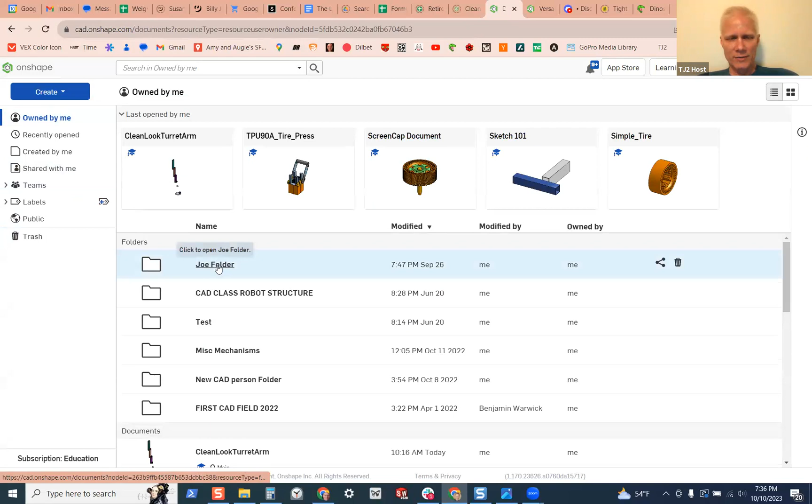Okay, so we go to Onshape. I'm going to go directly to a folder I've already put in here so I don't have to reshare everything, since I've already shared this folder with TJ2, so I don't need to give special permission to everyone. So I'm going to create a new document, and we're going to call it two-stage Falcon gearbox. Okay, so cool.

So just like normal, we're going to get things in here. We have to bring in some parts, so I'm just going to grab some parts at the very beginning. I have to minimize all your faces so I can actually see. I don't know if a Falcon is available, some things are. There are different options, I'm using MKCAD. You definitely should look up how to install MKCAD.

But for motors, under MKCAD I pull out this flyout menu here, motors, and I am going to grab a Falcon. Please be on here. I haven't done this - doesn't look like motors configurable shows it. That looks like a Neo. Does anyone know if it doesn't? It should be under motors, which is interesting. You don't see it? Yeah.

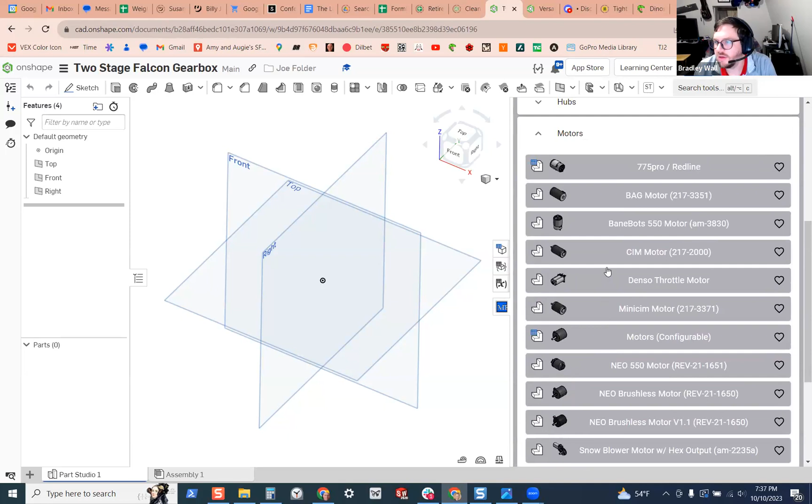What if I searched it through the search bar up top? Okay, I just typed Falcon, came right up. Falcon - that's so weird, I have it on my screen. Hubs, pulleys, I'm wondering.

Are you in the assembly? Oh, I'm in an assembly right now. Hold on, okay yeah, so the easiest way would be if it was just already here. I haven't done this before, but you guys may not be able to. You know what, you can just steal from other people - that's a way.

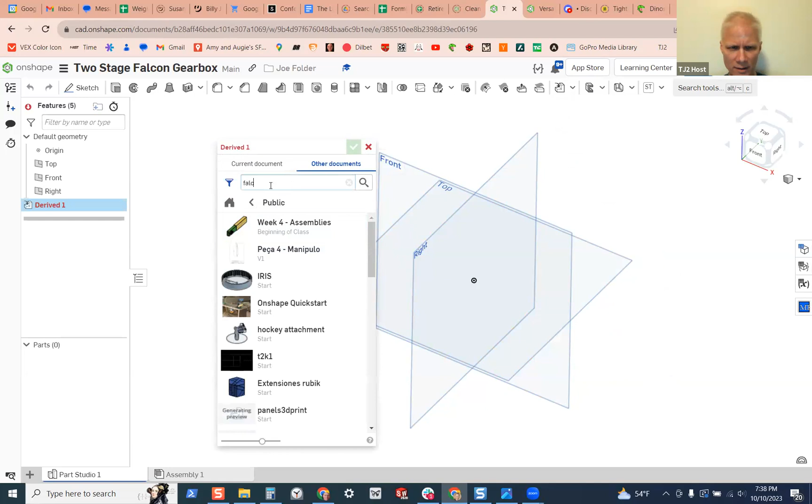So I'm sure the Falcon is available someplace in a public space. We can pretty easily go to a derived part, go to other documents, and search public, and I can put in Falcon 500. Let's see if it's someplace. If that looks like it's... it's in here, but it's not super simple. What if I grab one of these?

So the problem with the Falcon motor actually is that the motor you bring in is super complicated, so I don't really want to bring in the full complicated one. I'm just going to design the Falcon from scratch, because we don't really need to have everything. Wait, there will be some things in there that I do care about.

Okay, so we're going to do the next thing, which is go to Vex Pro, Vex Robotics, and put in Falcon, and there's going to be a step file we can just import. So, CAD files, and Falcon powered by - we want the Rev 2 or Rev 3. Most of our motors are Rev 2, I believe. Yeah, Rev 3 is the slightly bigger one, so I'm just going to grab the Rev 2.

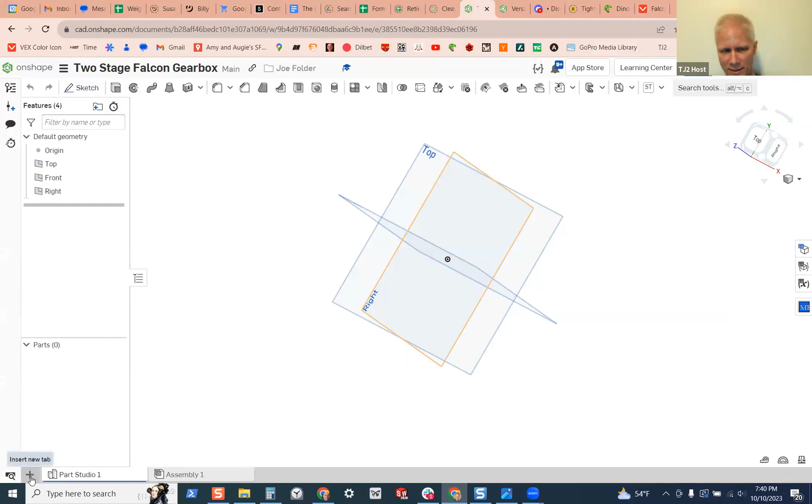It's downloaded, and now I go back to my folder here. I can't import it until I first make a tab here, and choose import. So I go to this little plus sign and choose import, and there's that Falcon step motor, and I'm going to put everything into a single file. So there it is, it's thinking.

Eventually there will be a thing called CAD imports. I'm not sure what information is in these files, but it will make a tab here someplace when it's done thinking. Eventually you'll see a tab show up that will have the Falcon motor in it. So that's one thing we needed - we need to get the Falcon in.

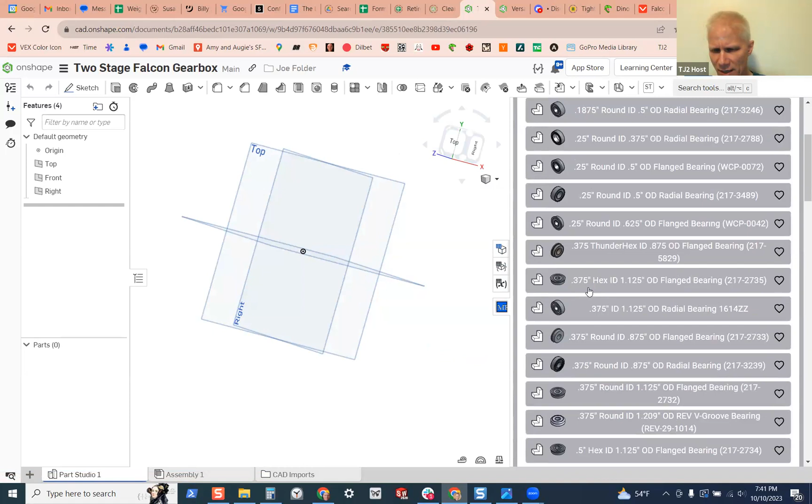We also need to get in one of our standard bearings. I think I've made it one of my favorites - no, I haven't. So we want to use a 1/2 inch hex bearing.

So I'm looking for my half-inch flanged hex. That one looks good, I'm going to put one of those in. It's just going to pop into the middle of the assembly. I'll move it later, but I just want to get one in.

And then I think we ought to use, yeah, we can just use this bearing. This bearing will be our bearing for, it'll be the one we use for all of them.

Meanwhile, as I was dancing around talking, notice this folder, this file just showed up. I don't like to have all of the things I import in my main assembly tab, so I'm just going to move that over and put it into the CAD import. Now it's sitting here in that file in addition to this file that I don't know what it does, but anyway, that's what a Falcon motor looks like.

So now in order to get back to my other tabs, I have to hit this home button over here. And then I can name the part studio, we're going to call it Falcon Gearbox.

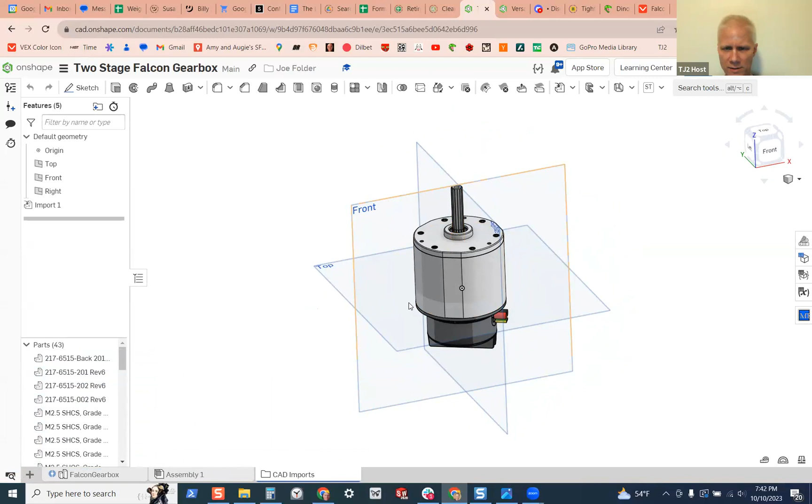Okay, so now, what happened to that? So first of all, if you look at what they import, there are just hundreds and hundreds of little parts. They have, can you see how as I scroll on this side here, it highlights the part. They've got the ball bearings, the literal balls inside the ball bearing. Who does that? We don't want all those things.

So let's go in and only grab the things that I really want. The things I want are this, that part, and that, and that. Those are all the parts that, oh wait, I also want the output shaft. So those are all the parts that I want.

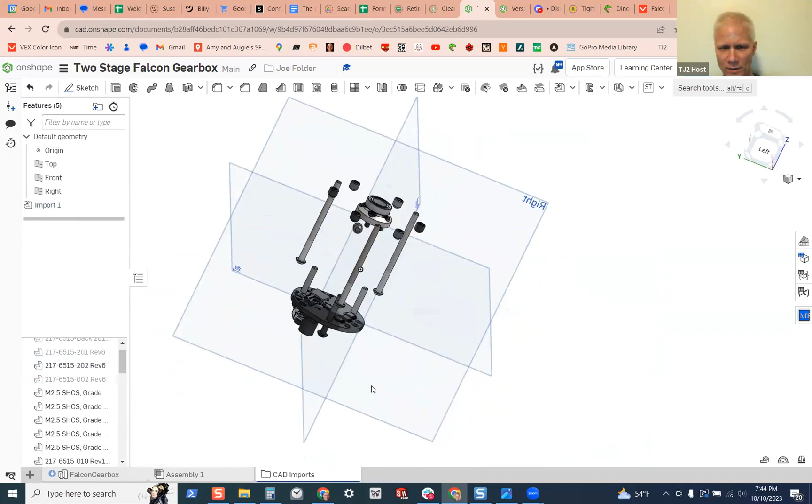If I make those go away, so right click, or I can just go over here, I make hide. So all of those things are just nonsense things that I don't want. Wait a minute, what happened to them? Oh, okay.

So I don't want all those parts. I want them to not only be hidden, but gone. So I'm going to highlight them all and hit my delete key, and they should all disappear once it's done thinking, because there's so many junky parts in here. Right click, delete.

Delete parts. And now I can grab all of these and make them show up. Now I've got a much simpler version of the Falcon, something I can deal with more easily.

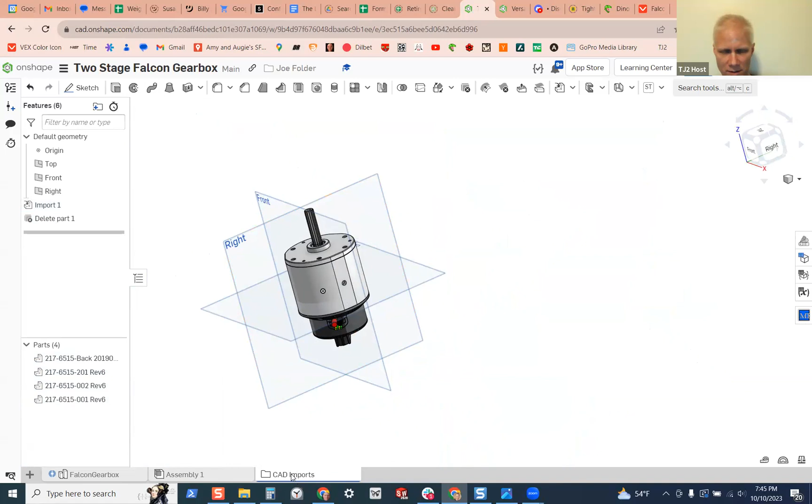So let's call this, yeah, that's fine, we'll leave it as one thing. Now I'm going to go back to my Falcon Gearbox, and I'm going to do a derived, and bring a Falcon in. So I go to my current document, and I can select them individually, or just select the whole thing. Then as soon as it's done thinking, I click the OK button, and it will magically show up.

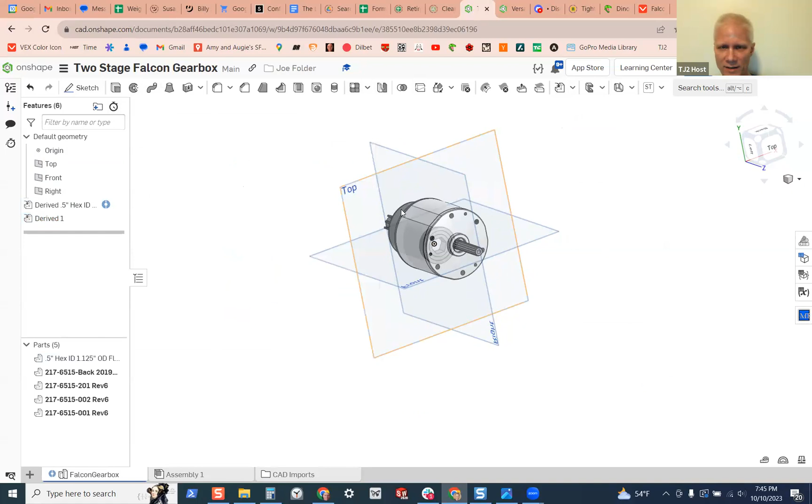So now we've got the motor, and we've got our bearing, the two things that we want, the hex bearing and the motor. They're not in a good spot, so let's...

Take and make something, let's make a sketch that we're going to use to help derive it, and I want the sketch to be in front of all of these imports, so I can know where to put things in. I like drawing on the top sketch, so let's make a sketch that will kind of lay out where all of our gears and shafts and stuff are going to be.

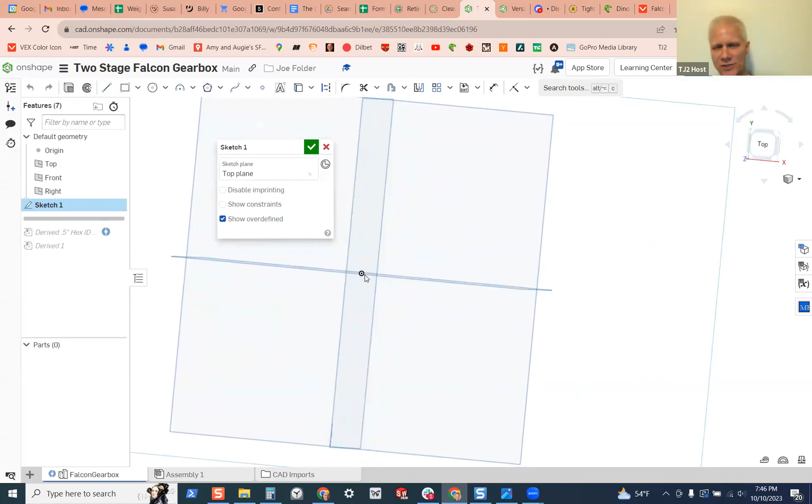So we sketch on the top sketch, and we're going to put in just some circles that are going to kind of take up the things. Also, I don't like seeing these, so those are all gone. We're going to draw some circles that are just going to represent the pitch circles for the gears that we're going to use.

So I'm just going to put them in a line. I said it was going to be a two-stage something or other.

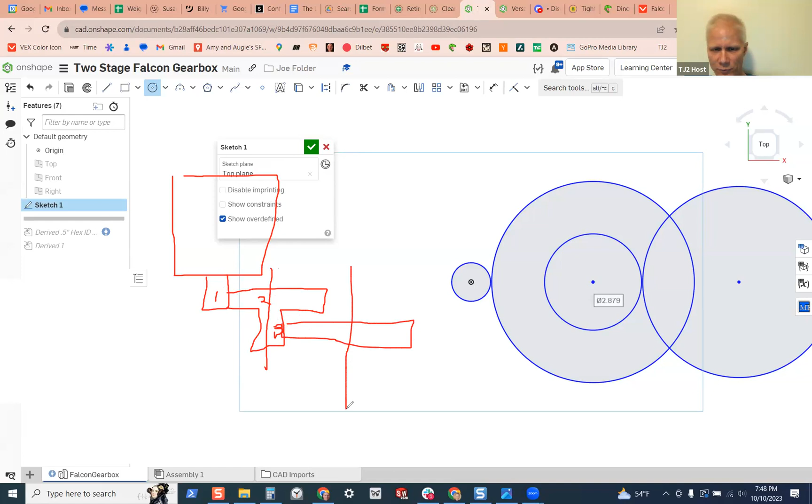If you look how gearboxes work, let me draw here for a second, annotate. So the way gearboxes work is the motor is going to have a gear, and then there's going to be a thing we call the cluster gear that has two gears on the same shaft. So there's gear 1, gear 2, then gear 3. Gear 2 and 3 move together, and then there'll be another gear over here that will be my output shaft, and then the shaft will go out. So the general idea is we're going to make a box that will kind of look like this.

It'll have a bearing. I'm just going to put X's in where I have my bearings, so there'll be an X there, there, there and there. So this is my motor, it has an input. I have 2 gears on the same shaft, and then I have another setup.

Now, how big are these gears? In first circles, it's very common for people to use what are called 20 DP gears, 20 diametral pitch - that's what that stands for, diametral pitch gears. That's very common.

What that means, the diametral pitch, is you take the pitch diameter - this little circle I've drawn here. The PD is equal to the number of teeth divided by your diametral pitch. That's kind of a formula we use a lot.

If you just go and grab the gears, they won't have - well, sometimes they have a pitch diameter, but not very often. But if you look at that, there are teeth that go above and below that pitch diameter, so they're bigger and smaller, bigger and smaller.

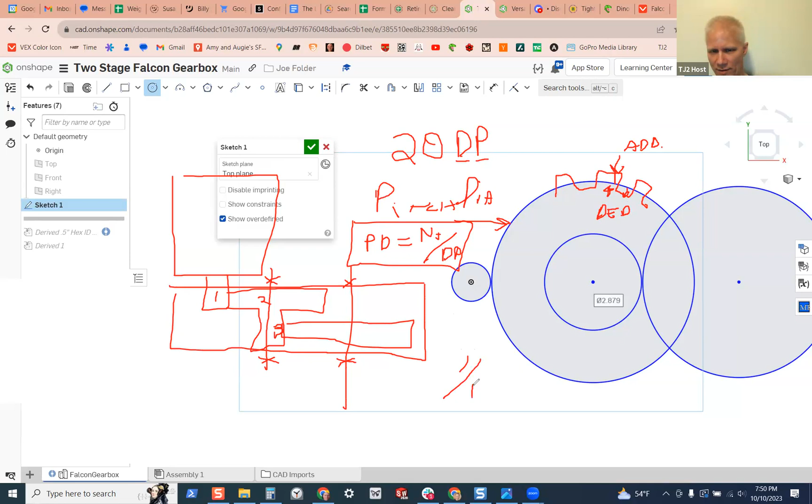As it turns out, for gears, the addendum is 1 over the diametral pitch, and the dedendum is 1.25 over the diametral pitch. So we go a little bit bigger, 25% bigger down, so that the tooth that comes in has a little bit of a gap between them.

So anyway, all that is to say that we need to keep track of 3 things about a gear. We need to keep track of this pitch diameter, so we know how far to put them apart from each other, because the pitch diameters are line to line on each other. And then we need to keep track of the root diameter and the OD.

So I'm going to clear all of this nonsense now, and I'm going to save my - well, we'll make the formulas as we want to do it. So everything in this sketch is going to be - I need to get out of this mode so I can actually CAD again.

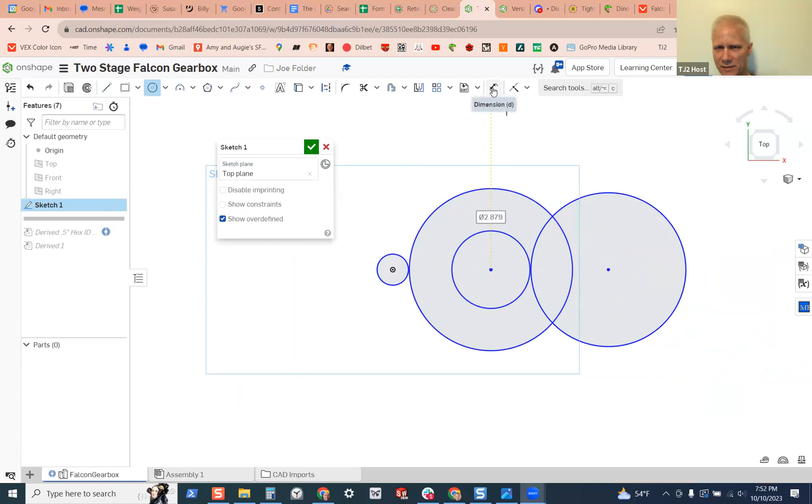So all of these things, this is gear 1, gear 2, gear 3, gear 4. Okay, so all of these things are going to be written as equations, so that we don't have to do anything.

So I'm going to just start putting in numbers here, and I put in a pound sign, and I'm going to call it a new variable - this new variable is going to be, we're going to call it n-gear-1, and that value - well, the problem is I want to put a formula in for, well, no, the n...

Actually, I don't know what numbers are available inside of that for a Falcon. Can somebody look that up for me? Can somebody look up how many?

You can go here, you can find search - well, I'll just do it. Falcon. And tight fit Falcon accessories. Yes, so that looks good.

And what are we talking about? They're 20 DP Falcon pinions. And what size do they come in? Joe says 8 to 14. 8 to 14, what's a common one? 10? We use 10s a lot.

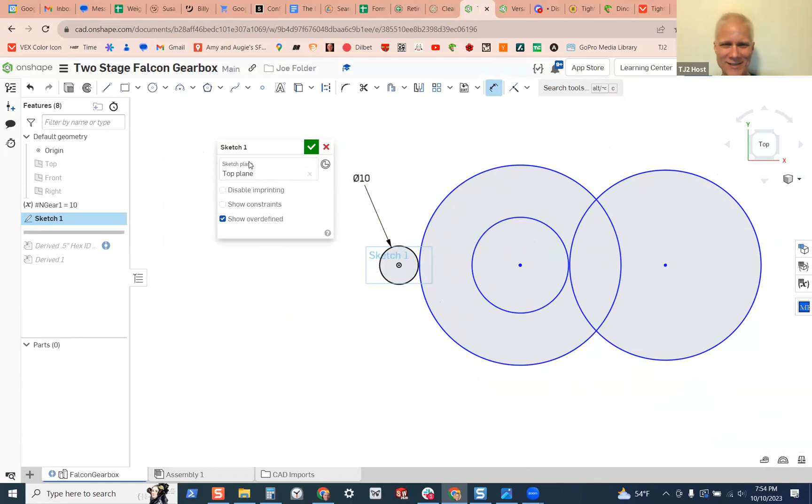That isn't really what I wanted. Sorry, I'm going to exit the sketch for a second, and I'm going to roll back up to here, and I'm going to make a new variable, because I should have just defined all these things beforehand.

We're going to call this the DP, and we're going to say that turns out to be - this should just be a number also - and it's going to be 1 over 20. No, diametral pitch is 20. Yeah, 20, okay.

So now I've got my DP set to 20, and I can go back into my sketch. I didn't want to have to define this separately, so I've got this variable, and I'm going to edit it to say the number of teeth divided by my DP. Yes, perfect.

That makes sense because another way of thinking about the DP is the diametral pitch - it's like the number of teeth per diameter. There's an easier way of doing it when you use modules - pitch diameter is 1 over the DP times the number of teeth.

So anyway, that's fine. 10 over 20 is 0.5. That seems perfect.

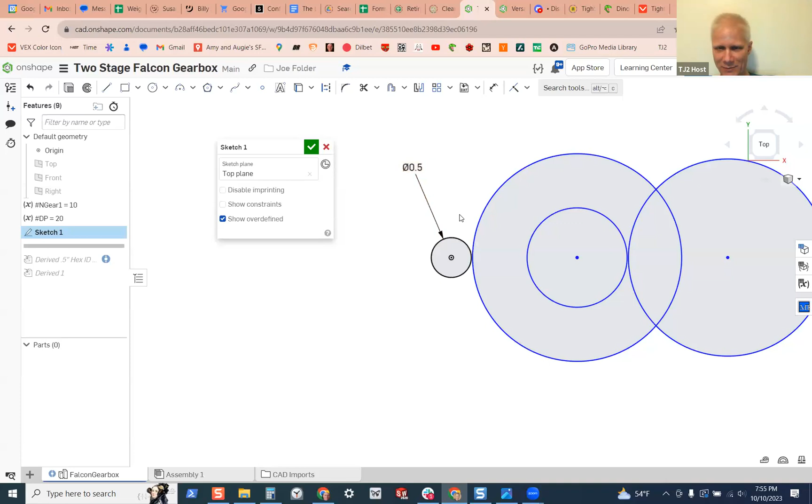We're going to make some things horizontal here. I want this to be horizontal with that, and I want that to be horizontal with that. And I want some tangents - this to be tangent with that, and that to be tangent with that.

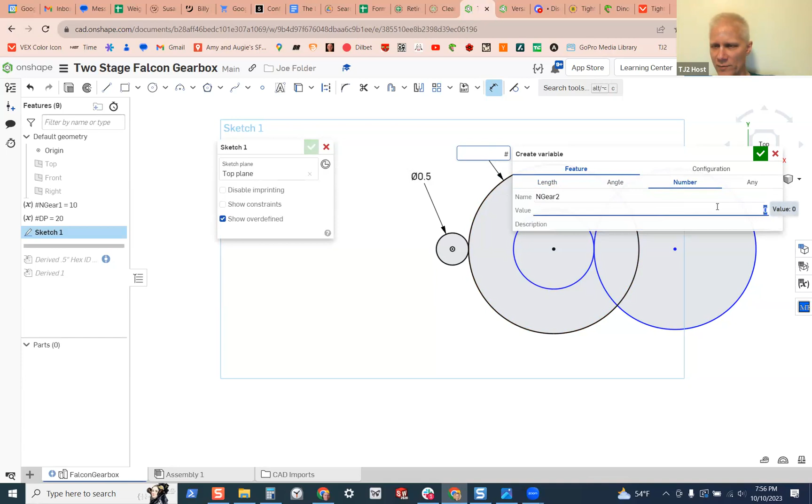Now we're gonna just define all of our diametral pitches here. This one is going to be equal to a new variable - it's a number, and it's going to be n gear 2, and the value is going to be, I don't know, say 40. 40 seems like a good number.

But then that isn't my diameter - my diameter is that divided by pound sign dp. All right, so now that's the first gear.

Then the next set of gears, I'm going to do this pound sign, make it a new variable, make it a number, call that thing n3, gear 3. We also want it to be something we can buy - I think it's pretty easy to buy like a 20-tooth gear. We can change these later.

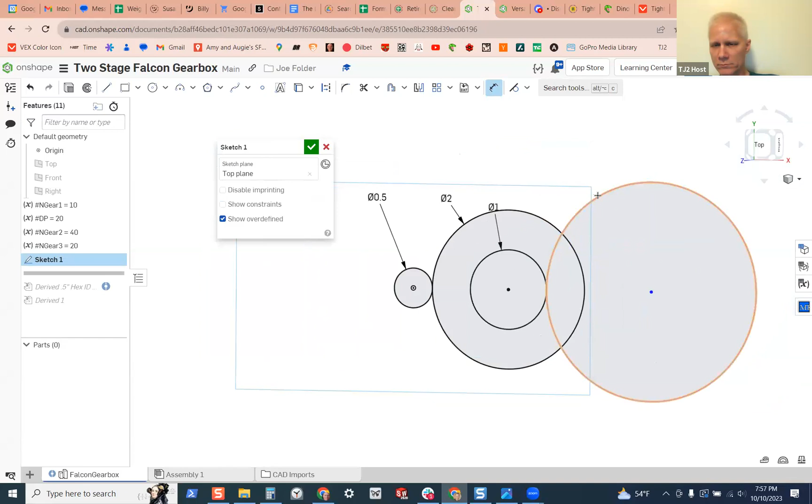But I want that to be divided by dp again. Okay, and then the next one - why don't we make it a 40 again? So here, pound sign, we'll make it n gear 4. And divided by - oh wait, I have to make it a new variable, sorry.

Variable, number. Let's make it 60, why not?

So then we'd have a 12-to-1 gearbox because we got a 4-to-1 in this one. Okay, so those are our values. Now we've got our center distance - notice everything is black, right?

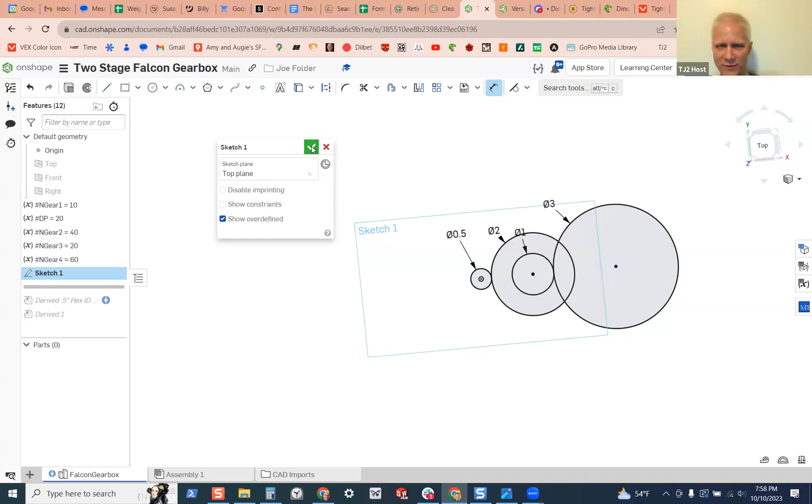So this is going to be our kind of master sketch for figuring things out. But what I'd like to do is, when we're designing things, we need to know how big of a room should we leave for the gear teeth and things like that.

So I'm adding teeth around here, and I'm going to draw some construction circles to keep us from getting confused - just a bunch of circles like this, one for every circle. Then I'm going to define the gap between there and there as 1 over pound sign dp. Hit enter - so that's how big the teeth are, that's how big the OD would be on this.

I can do the same on all of these - pound sign, 1 over pound sign dp. I know this seems like it's just sort of boring setup work, but...

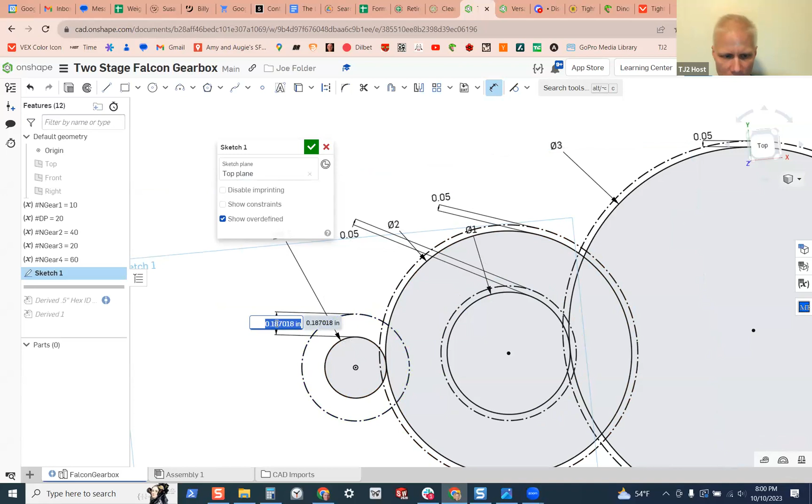It's going to make our future work very easy to change when we want to do things later. And from there to there - 1 divided by pound sign. Okay, so now that looks like a perfectly beautiful sketch that will tell us where to put other things.

I'm going to change the name of this, call it gear setup sketch. Okay, so now we can go down and put things where we want them to be.

So what I propose we do now is start putting our pieces where we think we want them to be. Somebody look up what are typical thicknesses of gears. When we imagine things, we'll have a bearing here, or we could actually import the gears, I guess. Yeah, why don't we do that too.

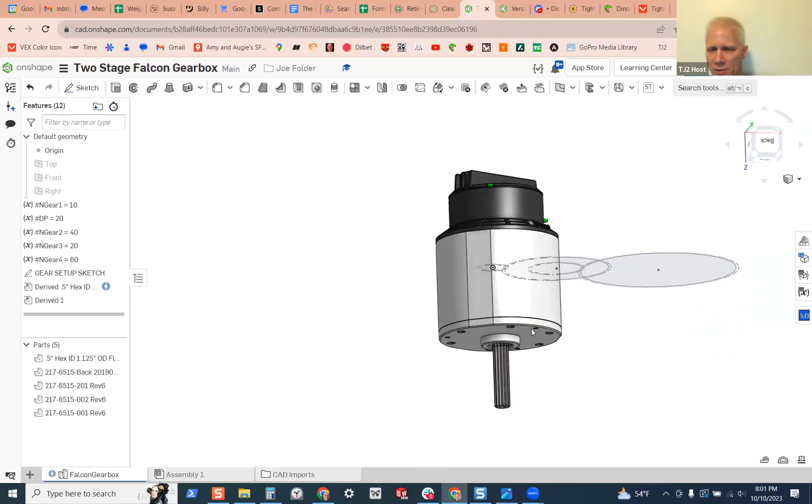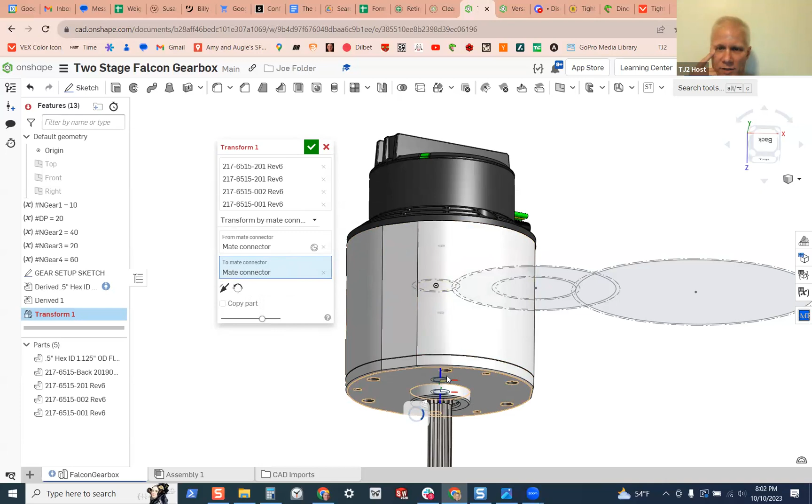So as I hit this, there's like an icon - see, that's the first one. And we want it to go up to that pitch circle there, boom. All right, and we're going to move the part, everything. It's thinking, but it should move it. And that's kind of what we wanted. Let's do that.

So now we're going to have to imagine that. Let me blank this gear for a little bit. We're going to have to imagine that we're going to have a housing that this is going to be peeking through, and we'll have to be able to get access to these screws to hold this in. And then we're going to want a bearing.

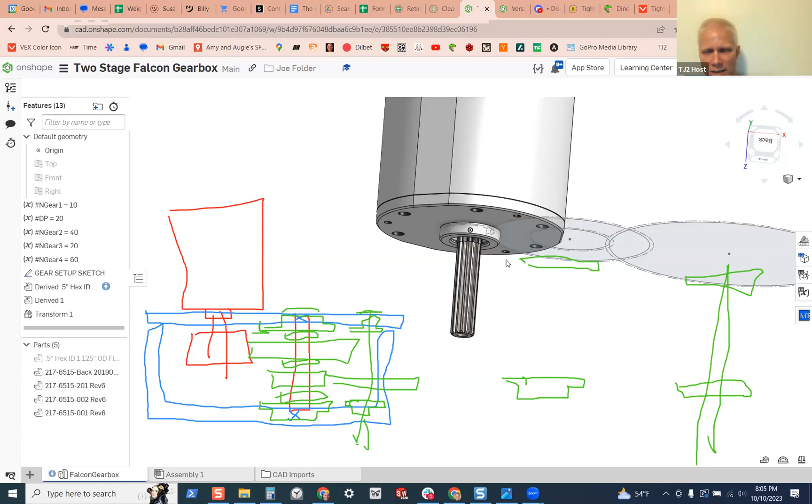The output shaft is going to be on this side, and we want this to be blind holes so that the shafts don't fall out. So we have to have enough room of the blue plastic to hold that in. Anyway, so what I was going to say is we could start placing these bearings in place so that we could see where things are.

Yes, let's do that. Let's put the bearing in where we want the bearing to be, and then we can see where we're going with the next thing. So I'm going to clear all my drawings and go back into mousing. Okay, so I've moved one thing and I've done a lot of talking. So why don't we pick somebody who wants to take this drawing?

You're going to have to find this Falcon Gearbox in my directory, and you're going to have to be able to open it. And then, well, it looks like I've hidden it. I want to see if somebody can move this to the right spot on here.

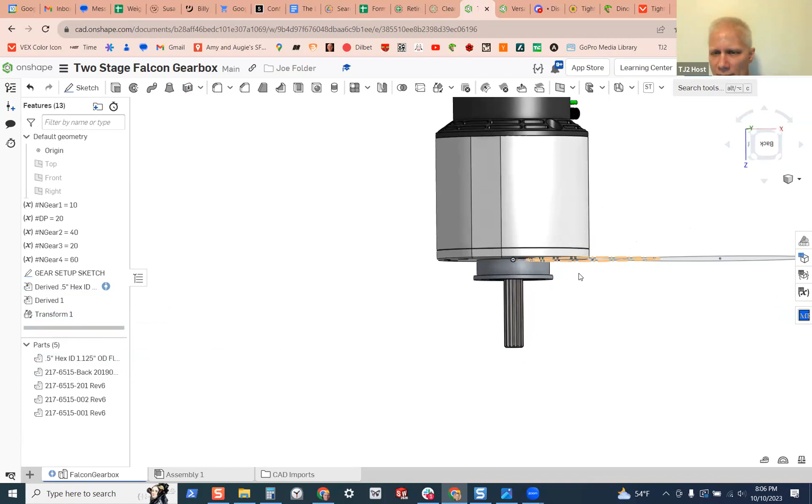I think it's going to take 2 moves the way we have it, because yeah, we're going to want to have that. We should, yeah, anyway, so let's think about how we want to do that.

So anyways, there's somebody willing to, let me be able to see all you folks again. Is there anybody still with me that would be interested in trying to do the move of this part that we put in? Zachariah, you usually are up for trying things. No?

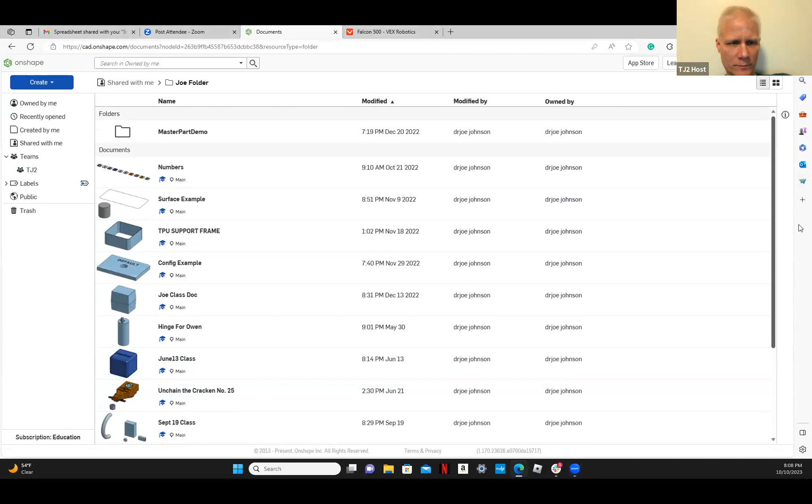Yeah, so we'll try to get them where we want them to be. All right, so find my folder. Is it this? Yep, 2-stage Falcon Gearbox. Yep.

Okay, so when we try to use move, once we get into the moving icon, so hang on, let me... will I be able to annotate? Yes, I can annotate. All right, I'm in red.

So the move part is this feature here. As soon as you go into that, you're going to be in the mode where it's asking you for different things. Pay attention, it's blue right now. So it's saying, what is it you would like to move? So what is it we would like to move? How are we going to select the bearing?

So you can just click on the bearing right there. Your mouse, just mouse over it and click on it. Okay, so see, as soon as you clicked, it showed up here. Right, and now it's asking you, so you can continue to click other things, but we're only doing 1.

That's fine. Okay, actually, why don't you go over here and let's get rid of the motor for right now, because we don't really want that. So just highlight, okay, so in the model tree, you can, down where the parts are listed, you can grab those 4 parts and turn that little eye, poke them in the eye, and they'll disappear.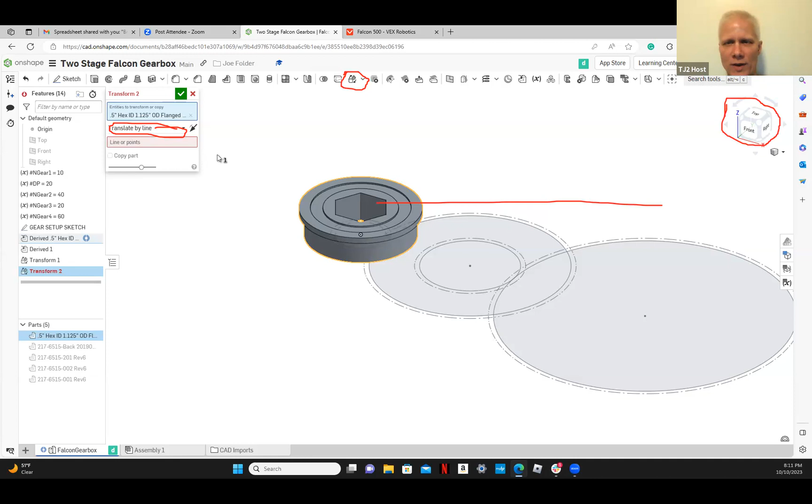Okay, transform by mate connector. Now, this is the one where you pick the from, and then you pick the to. So you're like, hey, what would I like it to do? Well, I would like it to go from where it is to this spot right here. So you would like this spot, this circle here, to be on the center of that circle.

So now as you're highlighting it, can you see it's kind of putting a temporary highlight? So if it were me, I would flip this over so I could really see the bottom side, because you really want to see things from the bottom. Yeah, there we go. Now you can highlight, if you highlight this edge right here, you'll see a mate connector show up right in the middle, right there, okay?

And you can pay attention that the Z is oriented the direction you want it to be. That's the thing we really want, that Z to be kind of lined up with our axis. So just as you're selecting things, you're going to want to kind of line up the Z's. All right, so that's good.

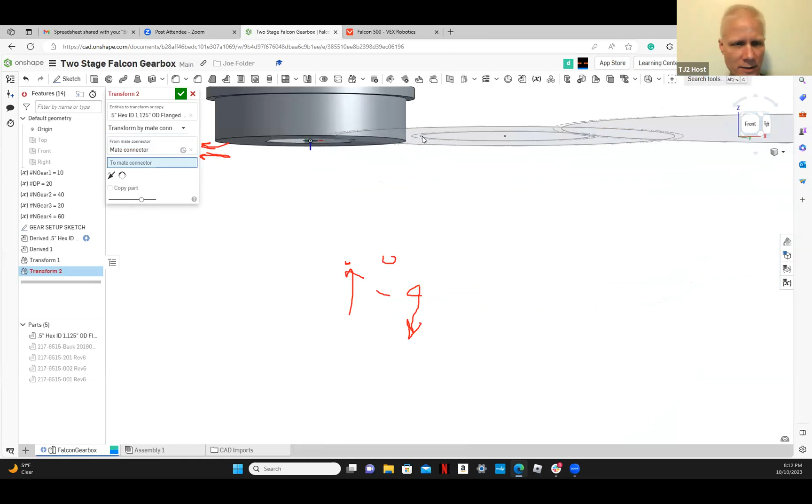All right, you picked the first one you picked. And now it's automatically gone to the second one, and we want to put it up here on that. Yeah, so you can now pick, that's fine. Pick one of those circles, and can you see which way the Z is going?

Yeah, that looks good, that's the way I want it to be. So pick one of those circles. All right, now it looks like, damn it, it did the wrong thing. It lined up the Z's, but there's this little arrow that lets you flip it. I'm back in mouse mode, I can't click. This arrow here lets you flip it, so you want to flip it. Boom, okay.

And you know what, we're going to put several of them here. So let's leave this one where it was born and put a copy part right here. It's going to leave the old one, and it's just going to make a new one for us. And we're going to click OK.

Okay, so now we've done it, except, you know what, now let's turn the motor back on. Go back over here and turn the motor. Let's be able to see all the motors.

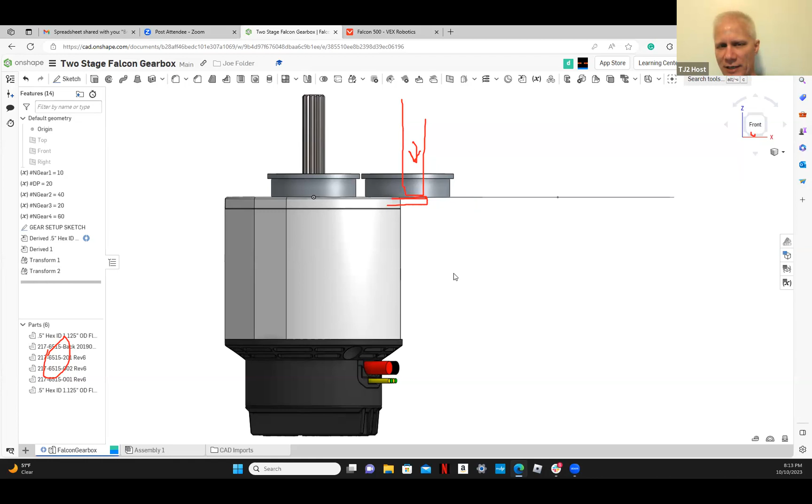Okay, let's look from the side. Give me a front view of this. Okay, remember we're going to have this axle come through here, and we're going to need some plastic on the bottom side of this axle so that it doesn't want to squirt out that way. So in order to put some plastic, I think I would like to have, let's say, an eighth of an inch. Imagine there's going to be this plastic here, and we're going to make it super thick plastic, right?

And, you know, maybe down the line we'll thin it up, but I want, when this thing is installed, I want there to be like an eighth of an inch of plastic that's holding my bearing in, my shaft in. So let's move this guy, and we're going to move it the second most common way. And that's good. We're going to move in a direction, and we're going to say, let's move in that Z direction there. Okay, so let me clear all again, and you're going to do another transform, and you're going to transform, and you're going to move that part. You're just going to kind of scooch it up a little bit.

So is it this one? From an XYZ, right? Exactly. And now you have to make sure you look at this over here, and you're like, all right, which way am I really trying to make it go? I want it to move up in Z, just put in like an eighth of an inch in there. Okay, and then you need to click on somewhere else or hit enter or something. Oh, we haven't picked what? It's still thinking, what would you like to move, please?

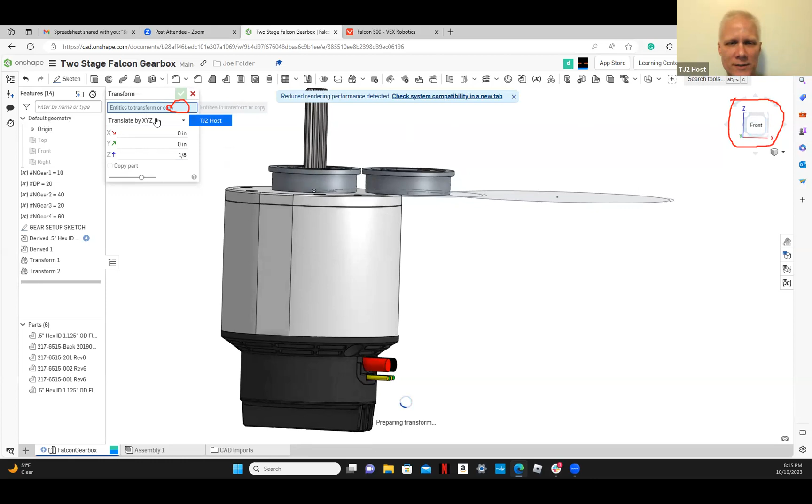So just pick the bearing. Bing, it's not letting me. I don't know why. It's not like you. So hit this X button right there just so that that warning goes away. It's not letting you click that. If you click right there, it's not letting you do it. No, well, try and click right there instead, down on the model tree instead. It says like preparing transform right here.

Okay, so it's thinking. That's fine, thinking is okay. It's like trying to give you a preview of what it's planning on doing. I sometimes, if it goes into this too long, if it does that spinny bit too long, I sometimes just give up and, like down here, I just refresh the page. But we'll see.

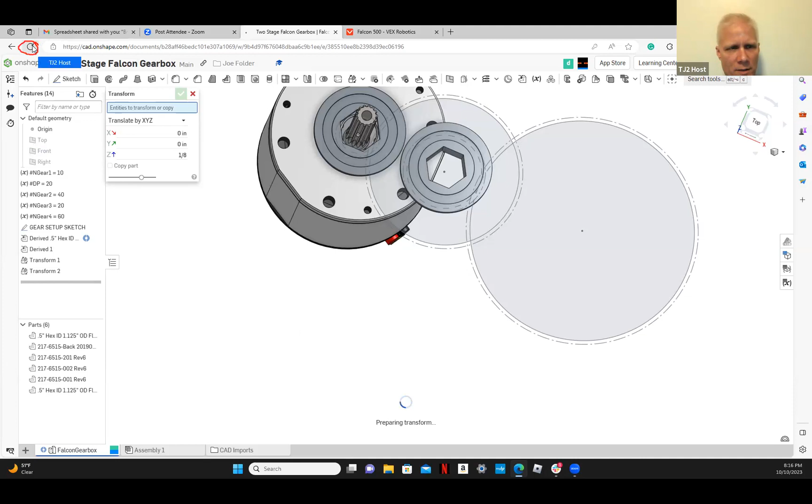Okay, let's look and make sure it didn't already do it. It does have two transforms. Okay, so let's edit this transform here. Right click, edit. Yep. No, we want to not modify that one. We wanted, oh wait, oh sorry, I was mistaken, the first one was the motor transform. That's fine, so the second one, no, we don't want to change this one. Leave this one alone, we want to do another transform, a new transform.

Yep, pick the part, just click right there. Yep, it's got it. Translate by, now translate by XYZ. Yep, put in an eighth. And we don't want to copy part, we want to actually move it. Yep, click OK, cool, all right. So you are now an expert at moving this.

All right, let's do the next one. Zachariah, why don't you do the exact same thing, only let's do it with the other bearing.

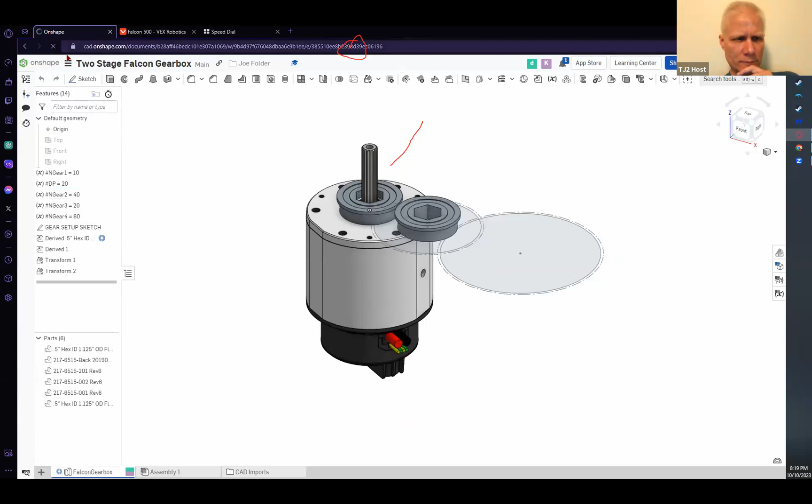Okay, so now go back and just do a new transform. Yep, good, yeah. We want to transform by mate connector first of all.

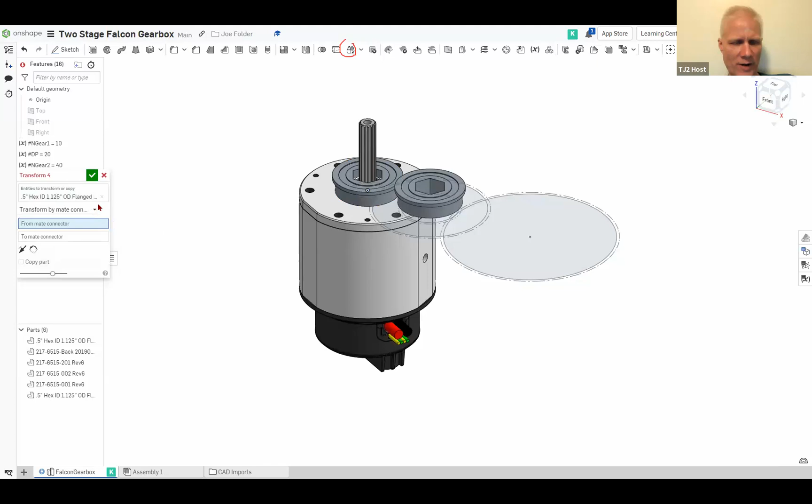Okay, let's get rid of the motor. Remember, we have to go back and hide all these motor parts because otherwise it's kind of tricky.

Good, alright, leave that one on, right? And then flip it over so we can see, we want to make sure we're selecting the right part. So flip the whole CAD over so we can see the bottom side of this.

Yep, that's good. Alright, and then pick this edge here. Alright, do you see the mate connector being shown, being picked? So it's giving you a selection of where the mate is, like if you just highlight down here instead, you'll see that the mate connector that's showing up is way down in the part.

We don't want that one. We want the one that's at the very top. So you pick the edge at the very top, right. Click that, and then click that circle there.

Good, now it's upside down. So we need to do our standard thing here.

Good, and then I think let's do a copy part instead, let's leave it where we had it so we can have it for later. Okay good, alright, that's good.

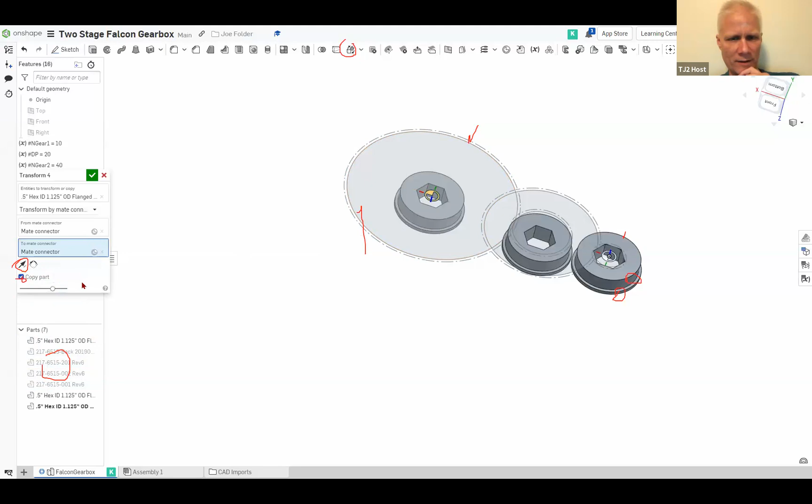Click OK. Alright, now how do we move it up? Because let's look at the side view. Go back and look at the front view here. Click on the front view so we can.

Alright, so we're done with this guy, so let's hide this guy over here, hide it. Yep, good. Now we want this guy to go up. What should we do?

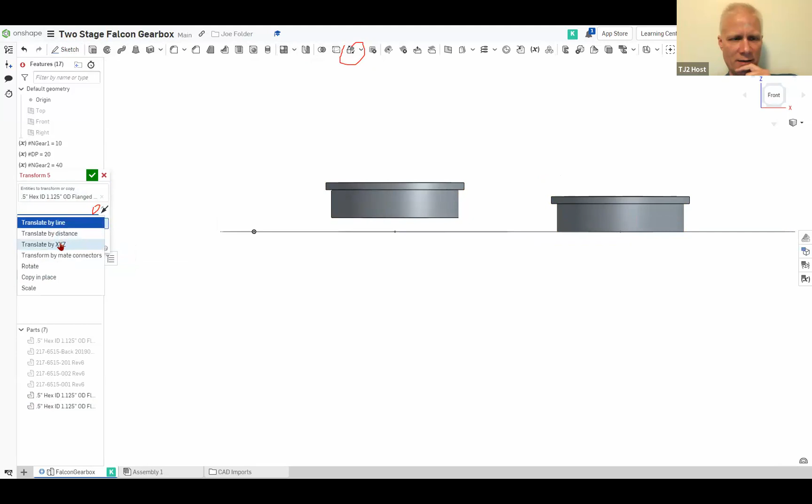We want to do a transform again. Okay, we want to transform this part. And we want to do it not by line, but we want to do it by clicking here. We want to do it by X, Y, translate Z, by XYZ. Yep, and we want to go Z 1/8.

You can put in 125, you can put in 1/8, you could put 3 point blah blah blah millimeters divided by whatever. You can put in whatever you want in there.

Did I press the OK button? Is that... this looks like 18. .125. Oh, point. There, that looks good. Click OK.

Alright, so now let's turn back on the motors. Everything except for that gear, right? Or that sprocket, or I'm sorry, that bearing. Get rid of that guy, we don't like that guy.

Good, alright, turn off that guy. Oh, why do you keep doing it, turning it on and off, on and off? It's kind of like freezing sometimes.

Okay, alright, there's a very convenient way you can do this. If you were to right click on this hidden gear, right click on this, you can... put your cursor like right, sorry I'm not in the drawing mode, sorry, draw. If you put your cursor right here, you can hit Shift Y and it'll appear. Shift Y, and if you hit Y, it'll disappear.

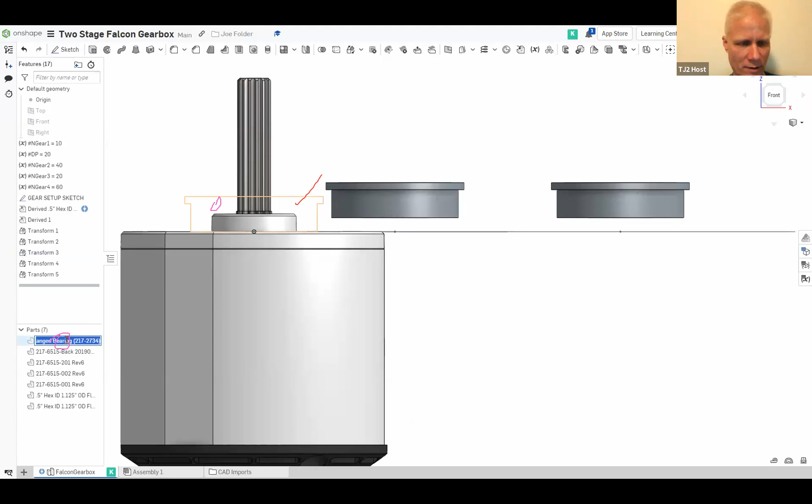Okay, so you can make things appear and disappear. You can also go over here and right click and say show all parts if you wanted to. Right click, you can hit show all parts, or you can hide all parts. So that's a very convenient shortcut, you can show all sketches, hide all sketches, show all planes, hide all planes. It's a very convenient shortcut.

Okay, so now we want to build a big thick piece of plastic that fills up this space, and then it should actually allow us to fit our gears in. So let's look back at the top view, go back to the top view.

So a common thing that we do in gearboxes is we get the gear ratios wrong. And we oftentimes would say, hey, if only I could make this gear smaller and this gear bigger, or if I could maybe make this gear smaller and this gear bigger.

So let's not make this gearbox be too constraining. I think what we should do is have a gearbox that kind of goes around here, and then give ourselves some space around it, like let's make it look kind of like a teardrop. That's a terrible drawing, but that feels like the kind of thing we want to do to fill that space, and then we'll end up putting the holes in to hold things and all of that.

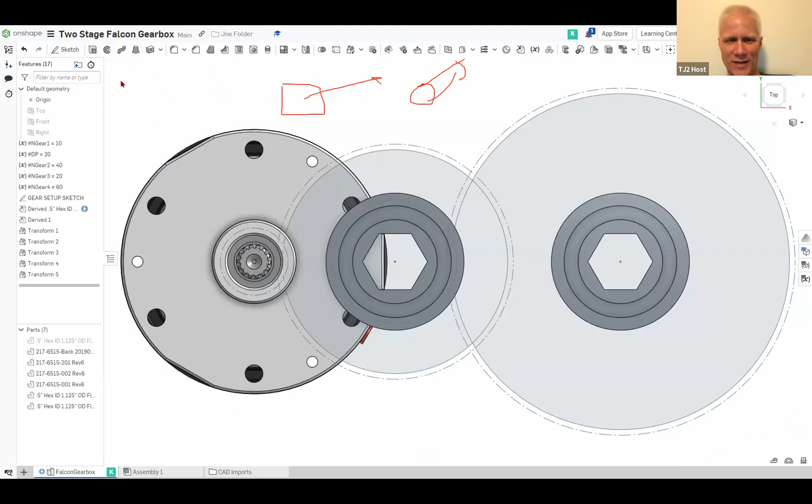We make a new sketch, right? We don't have to put it on the plane that we're going to use, but it seems like that would be a smart thing to do. So what plane should we use? The top plane. We could use the top plane.

We could use the plane of the motor here. We could, if you give me the bottom view, use like the underside of that. We could draw on those planes and then extrude in. It doesn't really matter too much. The top plane feels like a good one. Why don't we do that? Okay.

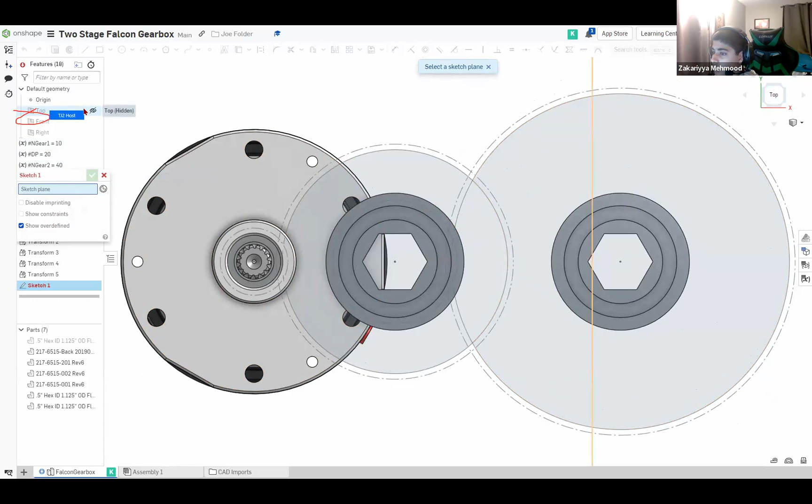All right, let's start drawing. Have we selected the top plane? There, that's the top plane. All right, so now we just want to draw a couple of circles, and then draw some straight lines that go in between those and have them be tangent, tangent, tangent, tangent, and then we'll cut these out.

So the first thing we should draw is just a couple of circles. You're right in that they don't even have to be anywhere near the parts, we can move them to where we want them to be eventually. Okay, that's good. How are we going to do tangents? We need to go over and do this guy here.

See, we don't want the horizontal, but we only want it on the... drag it over here now. And as you go, you can have it be on the part, or you can have it be, no, we don't like that. Does anyone know what this tool is used for anything useful? Brad, do you ever use that tool? I hate that tool, I don't want to be in that mode. For very specific applications it's not very useful. Overall, I don't use that tool. So anyway, we just want to break the string and start over.

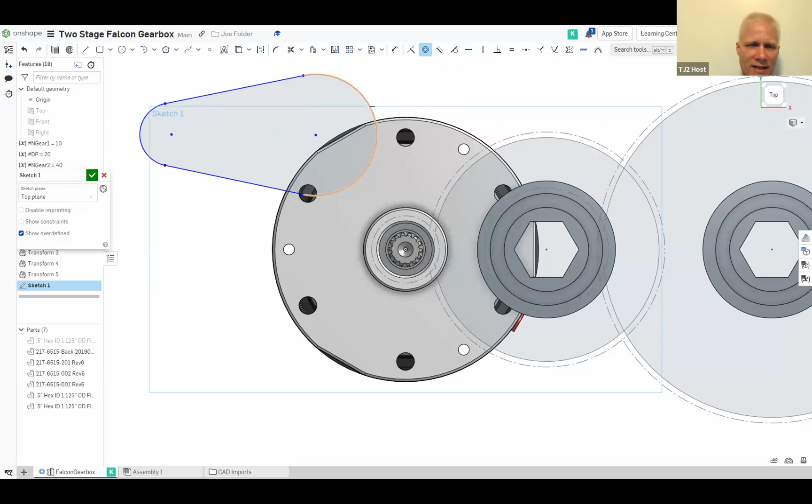Okay, so now we want to use the concentric tool. We want to say that this thing should be concentric with the circle at the root of that guy. Or we could actually use our sketch if we wanted to.

Like if we hide the motor, let's get rid of all the parts. Clear all. Right click here, right click on any part, right click over here, right click, and then hide all parts. So nice.

You did an undo, so let's grab this. You want to get rid of that. Hang on a minute, I'm in the drawing mode again. Draw.

You want to use the cut tool here. Cut and then drag. Okay, good. All right, now that's good.

And so now you want to use the concentric tool. You want this to be concentric with this. And then you want this to be concentric with that. With this? That one should be concentric with this one.

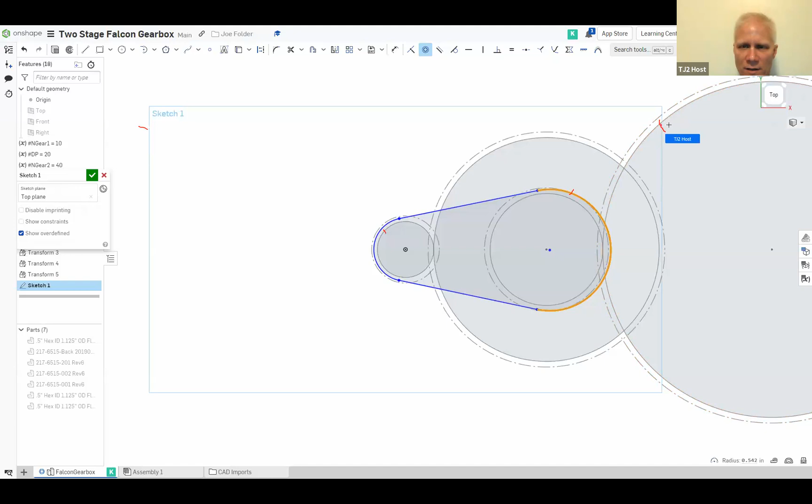Good. All right, and now you can drag this thing. Get out of this concentric line and you can drag this out because we want it to be big. Remember the reason.

Yes, and then you want this one to also be big. Drag. Well, actually, it doesn't matter, you can just start dimensioning something. So I happen to know that 2.5 inches is a good number for the Falcon, but we can turn the Falcon back on if we wanted to.

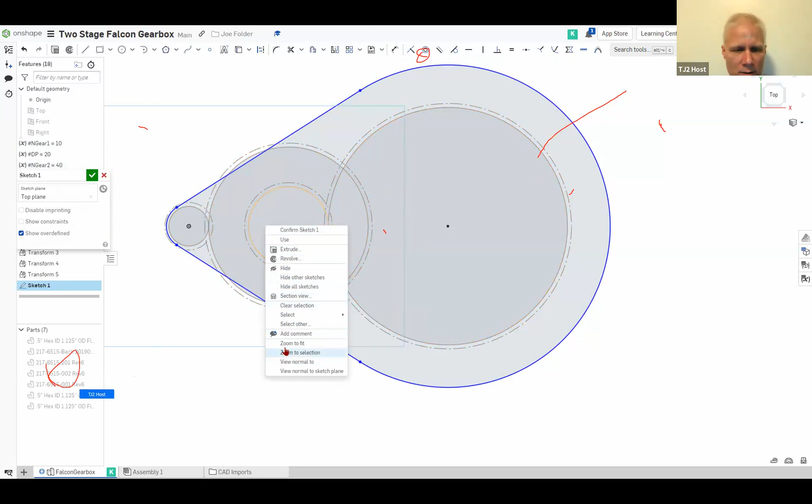So you go over here, right click, turn all of them back on. Right click, show all parts. Good. Okay, so now we want to dimension.

Where's your dimension tool? I don't know where your dimension, there it is. We want to dimension this guy to be 2.5 over 2. I forgot it's a circle, so we have to do like 1.25. What am I dimensioning? This arc right here.

Got to drop it someplace, drop it down here so we can see it when it's done. Yeah, good, make it 1.25. Yep, good. All right, and then how big do we want this gear to be?

What's the biggest gear we can imagine this being? Well, let's draw a construction circle. So draw a circle and draw that. There's no way we could ever have a gear be any bigger, the gear can never be so big that it would hit that shaft, right? You understand, if it hits that shaft, we're doing it wrong.

So if you draw a circle starting right here, draw a circle right on that dot, right on that dot, not there. Hang on, clear all, I want to make a construction circle that goes from here to almost there, just so I can see how big this thing really can be.

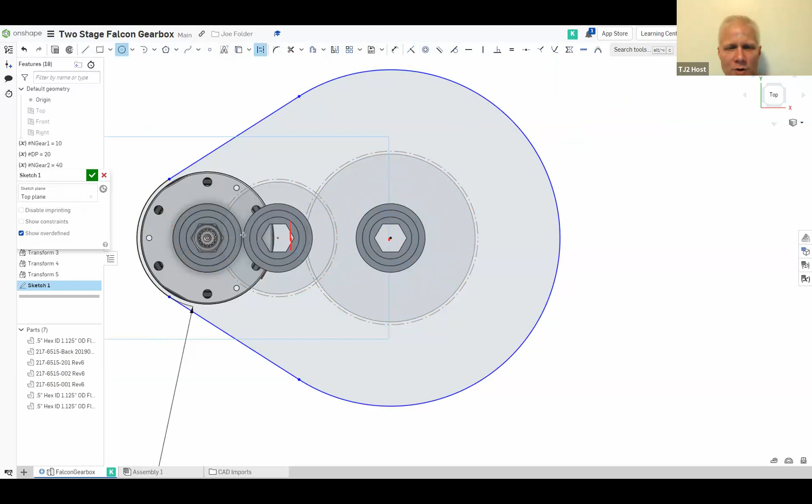Yep, then you click on the center of the circle first. Right here? No, right here. Oh.

Drag it out, drag it out, drag it out, drag it out, drag it out. And you want it to be out like tangent to this line here. Right around here? No, this red line that I'm just drawing horizontal. Tangent to that. Tangent to that. Do you not see this line?

Here, I'll make it yellow. The yellow line. Well, now it's in the wrong spot. Hang on, clear all.

The biggest gear you could have can only be that big. Do you understand what I mean? Because if it's any bigger than that, it's going to hit the shaft.

So drop it like right there. Drop it there. Drop. Click. Good. All right, so that's the biggest we could possibly want this. The gear couldn't be any bigger than that gear.

So we want to have this one here. This yellow is a bad number. So we want this guy to be kind of just a little bit outside of that. So we can be sure that we want to have like a wall thickness. Let's imagine that's like 1/8 of an inch.

So I don't know, we can dimension this to whatever it is, but to our eyes, it ought to be something like there where I just drew this. Okay, so put a dimension in and we'll just keep playing with the dimension until it's about where that line is. This one, you're dimensioning this guy.

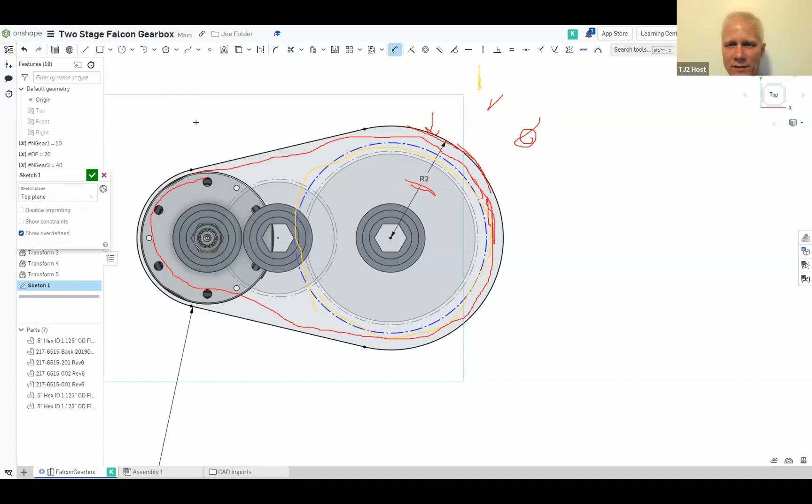Okay, so I think that's the slab we wanted to build, right? Clear all? Okay, so now let's extrude it. And what are we going to extrude it to? We want to extrude a solid.

Okay, and we want a new part, right? And we want to extrude that sketch that we just did. Now we don't want to do it blind. We want to say up to face instead.

Okay, and what's the face we want to go up to? Give us a side view so we can see what we're making. Okay.

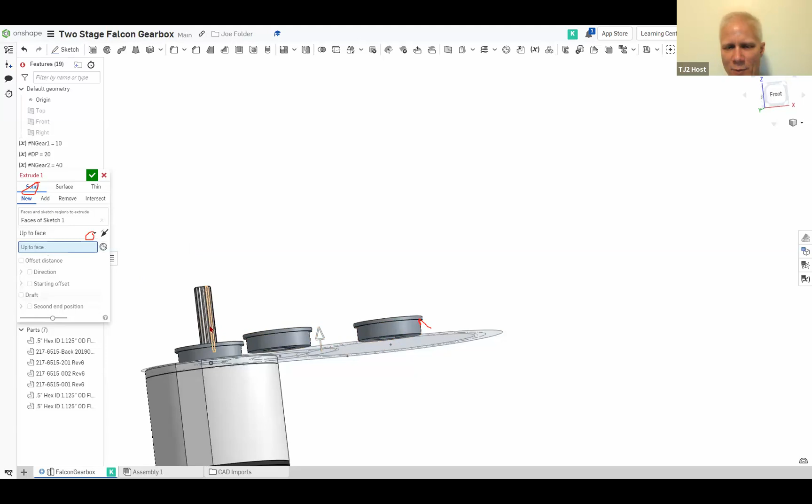Now, you can argue two things. You could either say it should be this face, and then the flange would stick up. Or at one point I said maybe we'd bury the flanges in the plastic. So why don't we do that? Why don't we go all the way up to that wall right there, the top of the bearing.

No, not the edge of the bearing, the top of the bearing. First of all, get rid of it. And we want to do this, that surface there. Good. Okay, click OK.

All right, so now you should stop sharing and let's get Carolyn involved. And you are going to do some archaeology for us. Now you are going to actually dig out all of the bits that we need in order to make everything work.

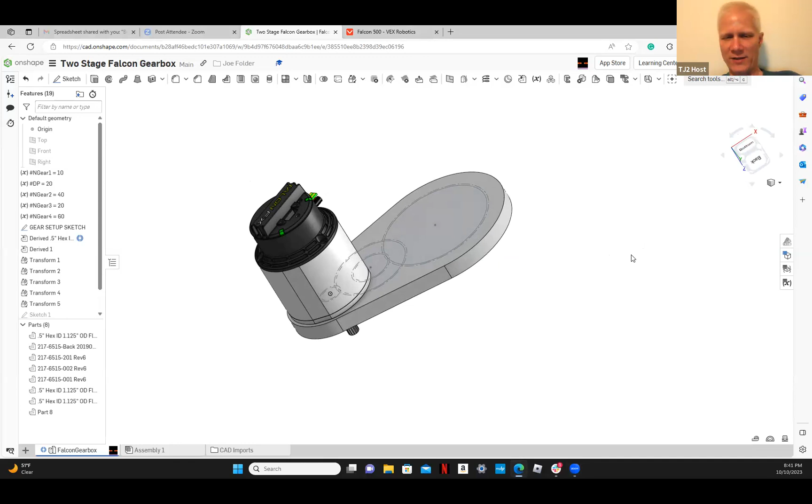Okay? Okay. So the first thing we need to do is make the motor fit. Because right now there's nothing, it's just this kind of teardrop shaped thing and the motor shaft doesn't go through. So in order to make the motor work, let's start working on the opposite side.

First of all, let's hide all of the sketches. We don't need those anymore. So go pick any line on, oh, I got to get into, sorry, I'm not in my drawing mode. Annotate. Okay, so pick any line in the sketch, and right click on it. Yep, that's a line in a sketch, and you can say hide all sketches.

So much more relaxing, right? Okay, so now let's go to a top view. Click over here, and we can now be in a nice top view. Okay, so let's sketch on here.

The first thing is, let's just put -- it turns out I happen to know this by heart -- it's 0.75 inches, right? So you just want to put a hole that's 0.75 inches right on top of that, okay? Now you could, in fact, let's do it this way.

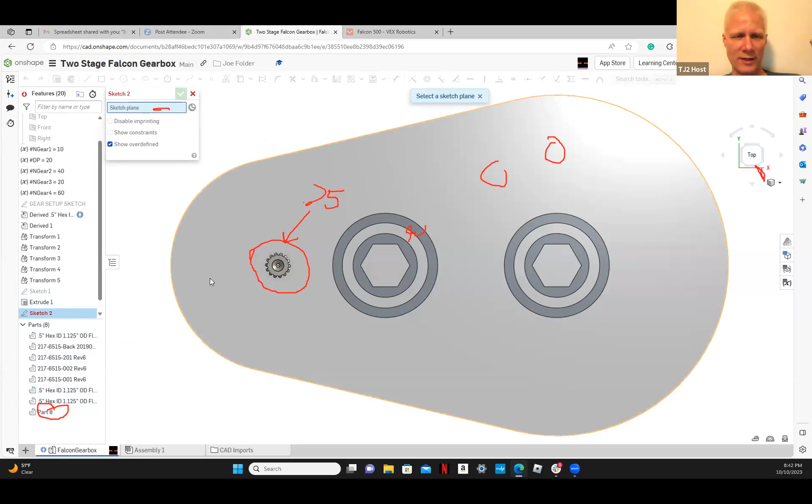Let's hide part 8. I know, well, first of all, no, let's pick the sketch. The sketch surface should be the top surface. So you're in that, just pick right there. Yep, right there, click. Now it's using that as your thing, and now hide it.

It seems counterintuitive, but the thing we're going to cut out of, we don't want it because it's offending us. Also, why did I ever leave that bearing there? Let's move that bearing. So hide that bearing also. The top, it's this one.

All right, good. So now, all right, what do we want to do? Let's grab -- you know what, to be better than just, we could grab the part, we could grab the surface, the edge, but let's actually give a little offset to the edge here, right? We're going to choose that function there, offset to the edge.

And now you got to tilt the sketch a little bit so we can actually see the part we want to get. And you want to grab that little curve right down in there. There, perfect, right? Click. All right, and now what is it doing? If you look at it, see, it's trying to draw a circle that's inside. Can you see where this arrow is? See that arrow?

And we don't want it to draw the arrow inside. We want it to be a little bit bigger. So drag that arrow to the outside. And as soon as it's outside, then just click OK. Just hit enter.

And now it's going to ask, what would you like it to be? Let's make it 0.002 of an inch bigger, and click enter. So that's actually 4 thousandths of an inch bigger on the diameter. That's actually kind of big, but it'll be fine.

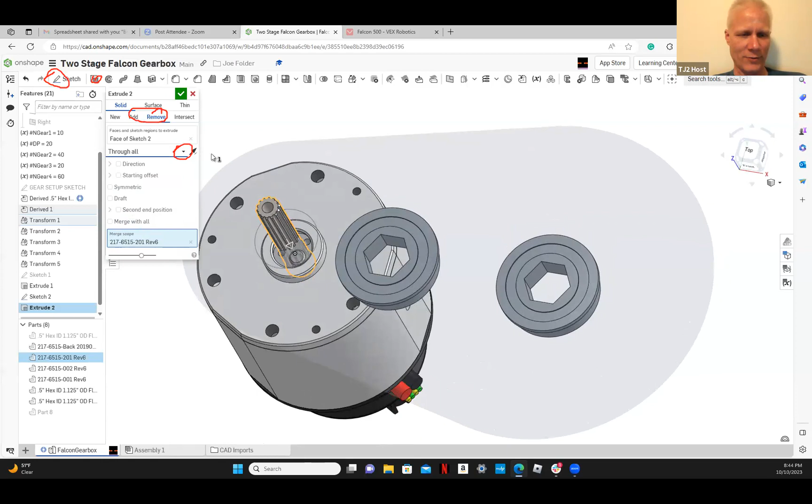And what is it saying? It's assuming we want it to go through that part. Well, heck no, we don't want it to go through that part. Get rid of that, click down there. And we want it to go through part 8, which we're going to rename as housing base, but we'll do that after we get this done. So then we click OK.

And now let's show this part and we'll see if good things happen to us. Ah, look at that. Pretty good, right? So we've done the first part of digging out this thing.

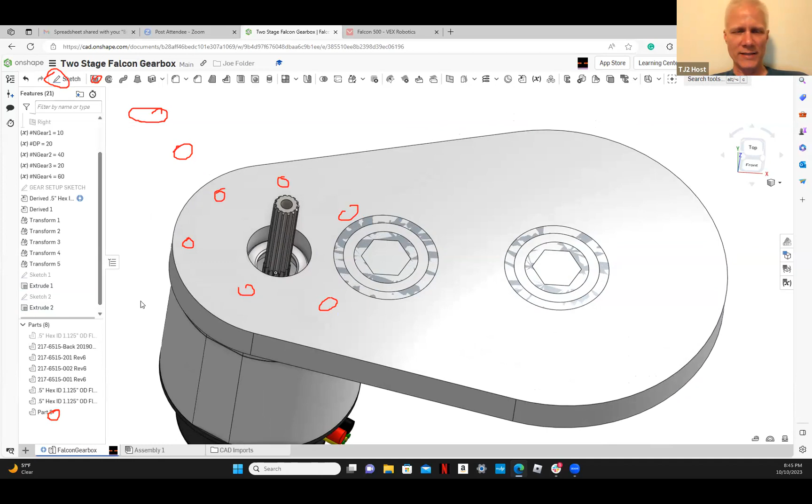Now we actually need to put some holes for these holes here. And we could go and grab them, but this motor is so common, you should just kind of know what to do on this by itself. So I'm just going to tell you to go in and draw a sketch, a new sketch. Well, you know what? No, we want to use holes on this one. So we're going to use the hole tool on this. So you should again sketch on this surface here.

And now we're going to use this polygon tool, and we're going to go into the mode of just a reference sketch. Okay, so now draw the polygon however you want to. Just click and drag it out, and then drop it however you want to drop it. And then make sure it's got 6 sides, and click OK. All right, so good.

That's excellent. Now all we have to do is we need it to be concentric. With what? Why, with that edge right there, it seems like to me, right? So that circle, and click on that edge. Good, all right, that's good. And then, as it turns out, the distance from here to here should be 2 inches.

Not the circle. So actually, let's do it over again because we want to choose a different one. Let's undo and get rid of the thing that we just made. Undo again. Let's draw a different one. Let me clear my nonsense again. Use the drop down, use this drop down here, and use the circumscribed polygon. And then do it over again, just do the exact same thing over again.

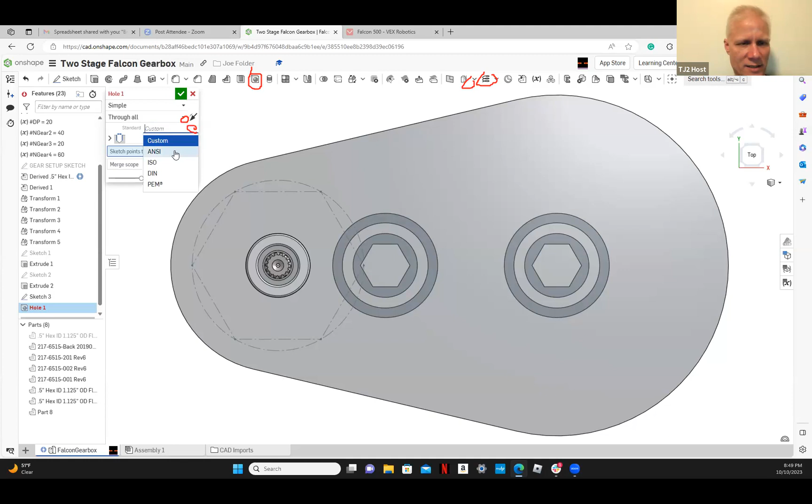Instead, we're going to use the hole tool now, and we're going to make them through-all holes instead of blind. And instead of custom, they're going to be ANSI, the non-metric ones. And we want to choose 10, number 10.

And free is fine, yep. If you really care, you can make it close, but we don't really care.

So now it's asking, like, here it's blue, hey, what do you want me to cut these holes into? Like, where do you want the holes to be? And so you should go in and click all of these little dots. And this one we won't do because it's just going to be in the middle of nowhere. Good, all right, and then click OK.

Oh, wait a minute, hang on a minute. Can you go back in and look at that one? Go edit this guy again. Here, this is wrong, we don't want it to go through everything. We just really want it to go through part 8. So get rid of the ones that aren't part 8.

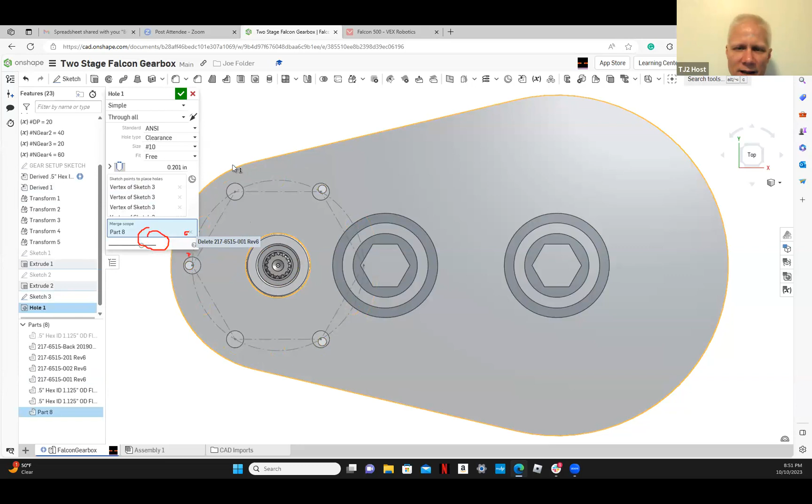Yes, that's good. And then remind me, we need to call part 8 gear housing or something like that. Let's rename this guy.

What do you want it named? I don't know, gear housing sounds like a good name to me. And also it kind of offends me that it's not a pretty color, so let's make it some other.

Right click on gear housing, and let's assign a material to it.

Just put in nylon, just type that. We'll go down here instead of none and type in nylon. Any kind of nylon is fine, nylon, glass filled, anything, yeah, either one, doesn't matter. And then click OK, and then so now we've assigned a material.

Now so now the weight would be right. We know how much it would weigh if we wanted to use this tool down here to find out how much this thing would weigh, right?

But we also want it to look a different color. So yeah, so now that we've assigned a material, it's telling us, you can click, you haven't select that part, click there.

And it would say this part would weigh a third of a pound. Okay, I can live with that. All right, so let's X out of this guy.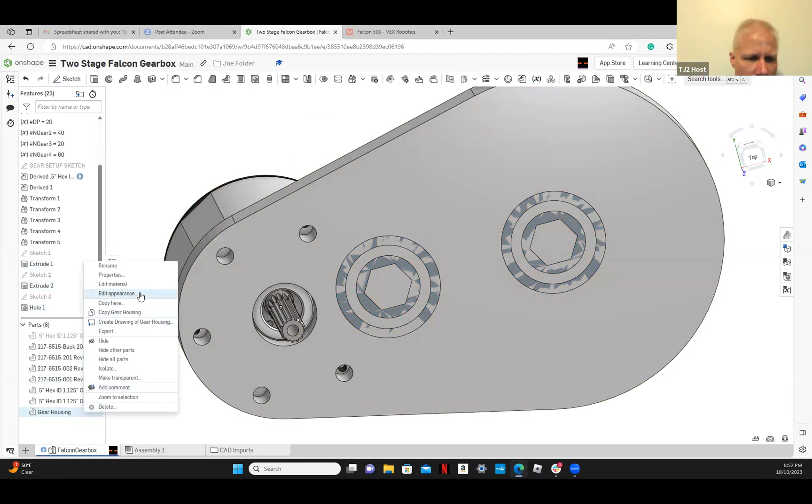And now let's assign a color to this. Right click, edit appearance. And pick a color that isn't white or clear or something like that. Ah, so nice, excellent. All right, click OK.

All right, so let's dig out one of these bearings, and then we will kick it over to Zechariah, and he will dig up the second bearing.

So let's do a section. All right, so in order to make this be easier, just to see what we're talking about, let's do a section. There's a command called Control X, Shift X, not Control X, Shift X, and it brings up and it says, hey, pick something that you want to do.

And I would say use the model tree and pick, I think it's the front plane. Go up and just drag that guy up. And there we go, that's the plane, the front plane. Nope, not that one, that one. Yes, beautiful, click on that guy. And then click OK, and now let's look at it and see what we're doing.

All right, so you can see what we're trying to dig out. You see? We're trying to dig out this thing, but we want to leave the wall, right? We want to dig out something like that, out of this.

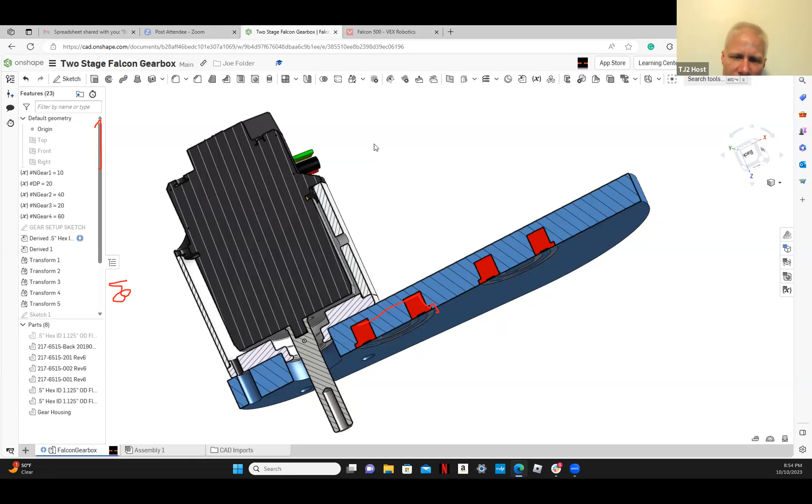All right, and so the easiest way to do it is to put a sketch on here and to do that offset curve. Remember when we did the offset curve, we can offset by the flange. It doesn't matter if it was a little bit big, so you could go off by 5 or 10 thousandths or something like that.

Anyway, so now you can actually stay sketching in this mode just to see that everything still worked. Okay, so what sketch plane do you want? Why, you want that guy.

X. So sketch plane here, you want to pick that plane. You want to pick the top. We're gonna dig down from the top.

Yeah, click here, click that. Do you see what I'm saying? You want to click.

You want the sketch plane, you're gonna end up having to make a bunch of sketches that you're gonna dig down in. You're gonna like, do you see what I'm proposing? Yeah, so the sketch plane, it's asking you which sketch plane do you want? You want it to be the top of your part.

You not understand? I'm just wondering if I'm not saying it right, because you can see I'm a little bit confused. So is it like this part right here?

Yeah, so we're going to take, and you know what, let me do one and then you can do the second one, okay? Okay, so I'm gonna just, you stop sharing and then I'll stop sharing because I think we've...

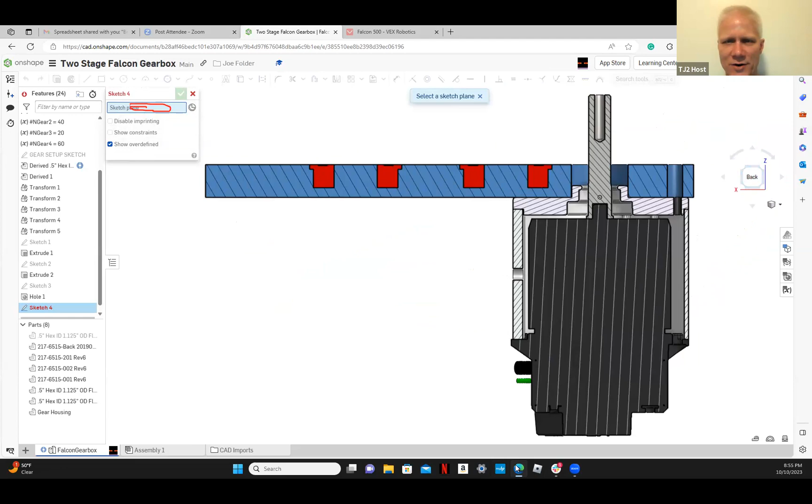Okay, so let me share my screen. Good. Okay, so here's the part.

I am way behind, so I'm going to fill in. Why isn't it showing all the parts?

Getting boring. All right, so now this is the part. I'm going to hit Shift X and choose the front plane just because I want to be able to see that I'm doing the right thing. I don't need to see the whole thing at once, I can know that I'm only working on half of it.

And now I'm going to take and make a sketch. It's saying, hey, what sketch plane would you like? Well, I would like to draw on that sketch plane. Thank you. And then what am I going to do?

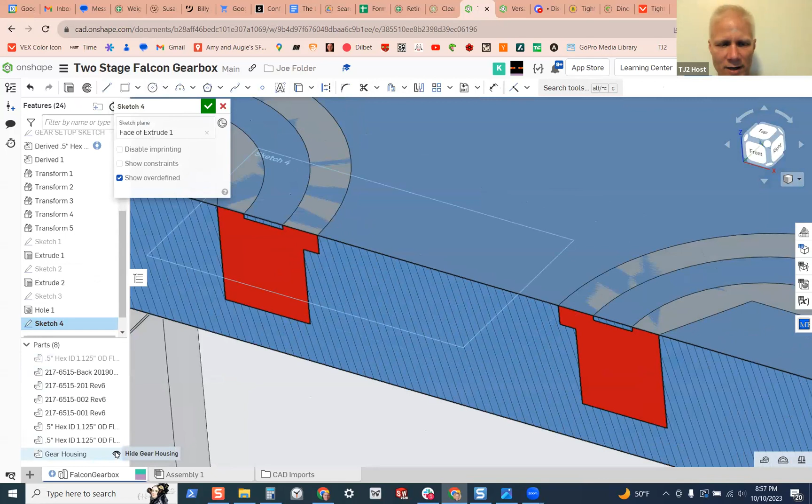Well, I want to use this little offset tool. First of all, it's annoying to have the part I'm drawing on making it hard for me to see all of the parts I want to grab. So I'm going to make this guy go away. I'm eventually going to dig into that part, but I don't need to see it right now.

So I'm in the offset mode, I'm going to offset that guy. How much should I offset it by? Well, I don't know, so I'm going to say 0.01, 10 thousandths of an inch. Seems fine, right? Looking at it, that's like, yeah, that looks like a perfectly good gap.

And now that's my whole sketch. I'm going to exit that sketch. And now I'm going to extrude. What am I going to extrude? The thing I'm going to extrude is that sketch I just did.

I'm going to do a remove, and I'm not going to go blind, I'm going to go up to face. And this is why I made that thing disappear, so that I could grab that guy. And what am I going to use for the merge scope? I'm going to say it's that guy.

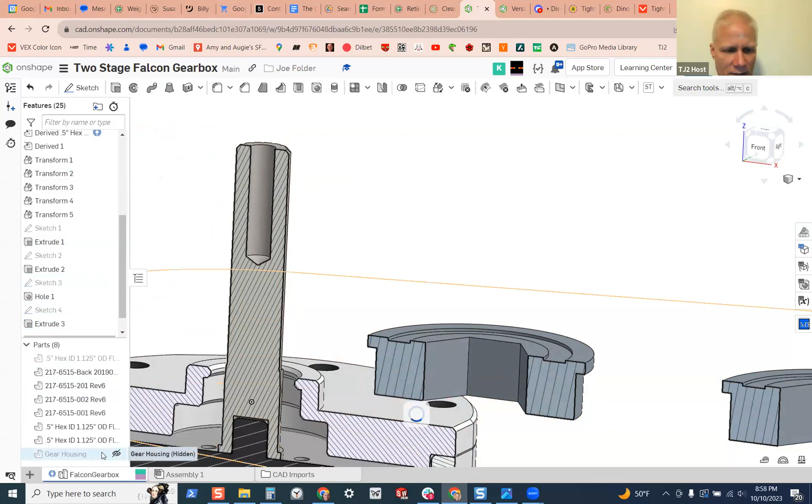I click here, and now I'll show it, and you'll see that the red has disappeared because, hang on a minute. Part of the red has disappeared because I put a hole in some of it. I've done what I call dig it out, right? I've dug out the first part of it, and now I just need to dig out the last part of it.

So how much do we want that to go in? We just say, what are we going to do? We repeat it: sketch, pick that plane, that's the plane I want. I make this guy go away. I'm going to use my same favorite tool.

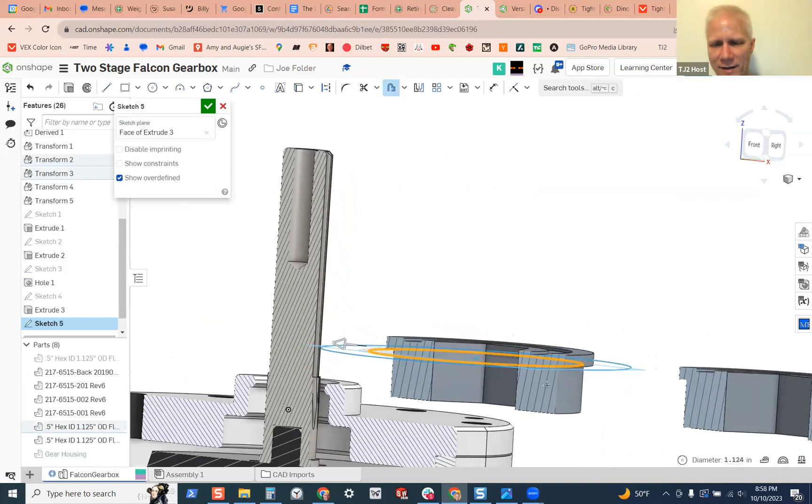I'm going to offset this one. I want to be tight, so I'm only going to go off by like a thousandth, 0.001. So that one is going to be a pretty tight hole. Probably would have to force it in, but we don't really care if we have to force it in because we don't really want it coming out.

Oh sorry, no, I'm out of the sketch. Now I go in, I remove what sketch I want to remove from that sketch. I'm going to have it be through, no, not through. I'm going to have it go up to face. What face am I going to have it go up to? I'm going to have it go up to that face.

And I'm not going to make that part go in, I'm going to take it out of the gear housing. And this one I'm going to make it go a little bit deeper than that, because I want the flange to decide how far it goes in, not this here. So I'm going to do an offset distance.

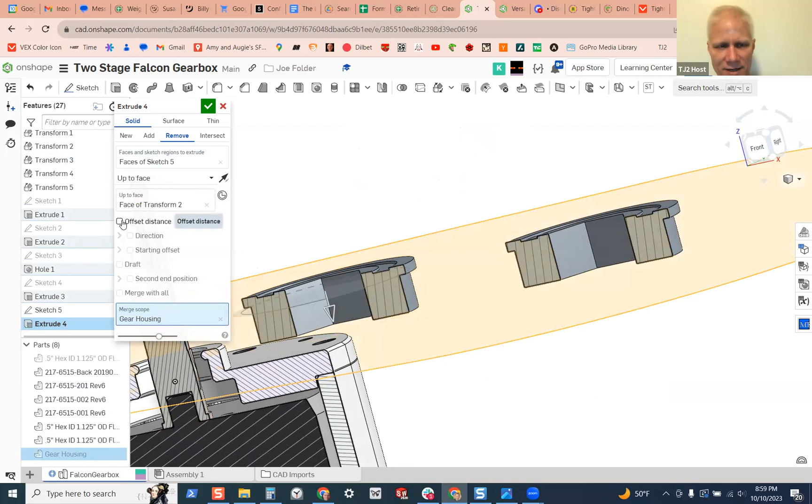Now I need to be able to see my part, because when I see it, I wanted to know that I'm at the right spot. Offset distance, that's too far. 0.0, I don't know, a half a millimeter seems like a good number. So I can look at it and say, does that look like it's enough? Yeah, that looks like it's plenty, right?

And then I'm going to do one more thing. The one more thing is, I hate it when I can't get a bearing out that I pushed into a hole. So I'm going to put 2 holes in this part. I'm going to get out of this mode, do another sketch. It's just going to be a very quick sketch.

I'm going to do it on this plane, and I'm going to just draw 2 circles. Hang on a minute, that bearing needs to disappear so I can see the hole I want to do.

I'm going to do 2... sorry, circles. Sorry to interrupt, but I have to go. Oh, sorry, yeah, it's time to go.

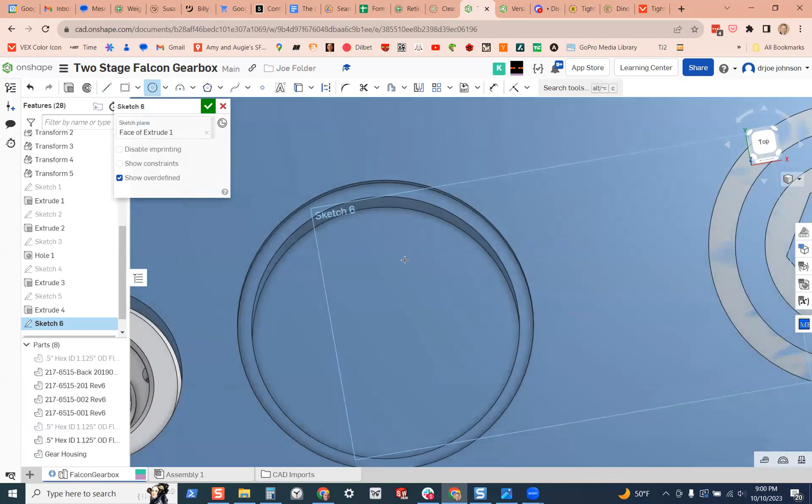Shoot, sorry guys. So I'm just going to draw 2 circles very quickly, right? Where is this? Make it be on the top so everything is horizontal. I would like to draw a line.

Hang on a minute, I'm going to do some goofy things here. I'm going to draw a line from that to that center of that hole. Sorry, I'm going to make this hole, that thing come up into the thing here. And then I'm going to go horizontal.

I'm going to choose that and that. Oh, sorry, wrong one, Control Z, vertical. I'm going to choose that and that, make it vertical, and that, make it vertical.

And then I have to do... put that on that circle and put that on that circle and put a dimension. Where's the dimension? Quick. So that dimension, I don't know, make it 1/8 of an inch, that's enough to be able to, like, oh.

And then I got to make these 2 equal, that and that are equal. Okay, and then I'm just going to go through all. Remove, merge scope is that, through all.

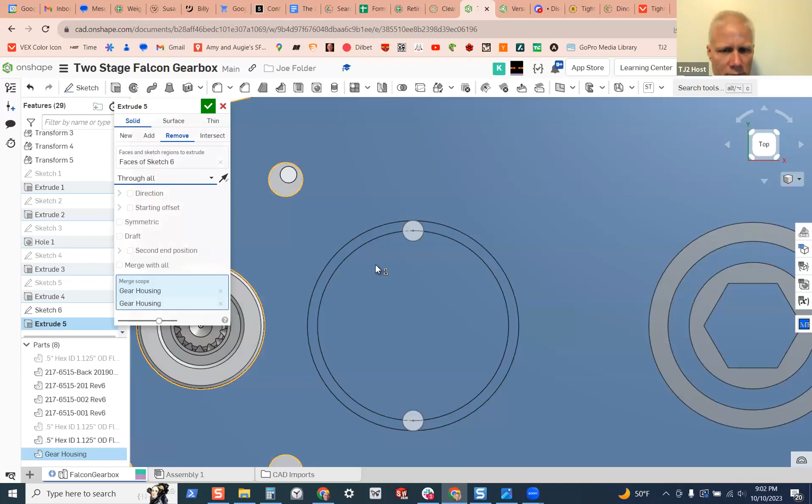One gear housing, through all. So, yep, that's good. All right, so this will let us, now if I put the bearing back on, this will let us, like, when we want to take this thing apart, we can take and put a little screwdriver or something and push it out, right? So we can do that.

So we're beyond the end of the class. What I would suggest you guys do is you can make a copy of this, and you can, well actually, you guys could just keep working on this, right? We should make another hole that looks just like, hey, what happened to my...

Hang on a minute, where did my holes go? Oh, they're hidden by the bearing. Sorry, they're still there, yes they're still there. Yeah, but because I've got these holes here, I can push out this bearing. So anyway, you could do this exact same thing to dig out this bearing.

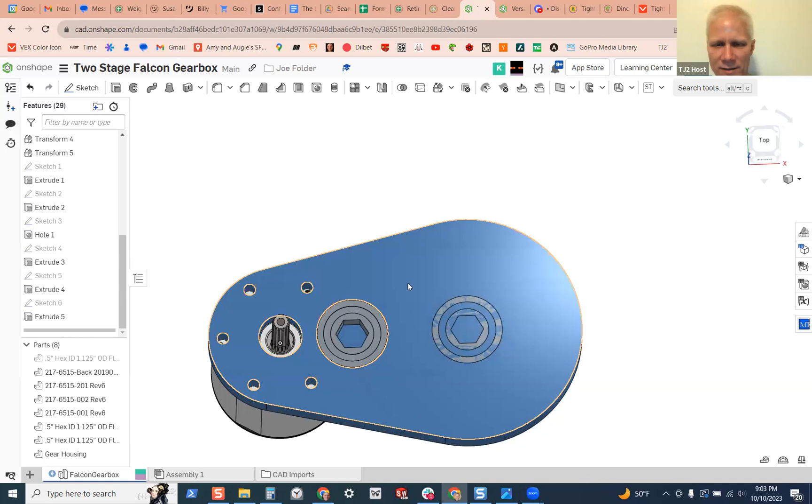And then the next thing would be to put in a wall here, you know, very quickly to build a wall. I mean it would be pretty straightforward, I'll do it and then I'll undo it so you can do it quickly. I can just say, I can do a sketch.

I'm going to grab that surface. So now, oh wait a minute. Yeah, I'm in that mode. So now I've got, I just grabbed, if I hide this gear housing, you see, I've made that.

I don't know if it's going to be an inch, inch and a half. I'm not sure how tall we'll need this to be, but we'll just say an inch for now. It's new, no it isn't, it's going to be an add, and we're merging it with that guy.

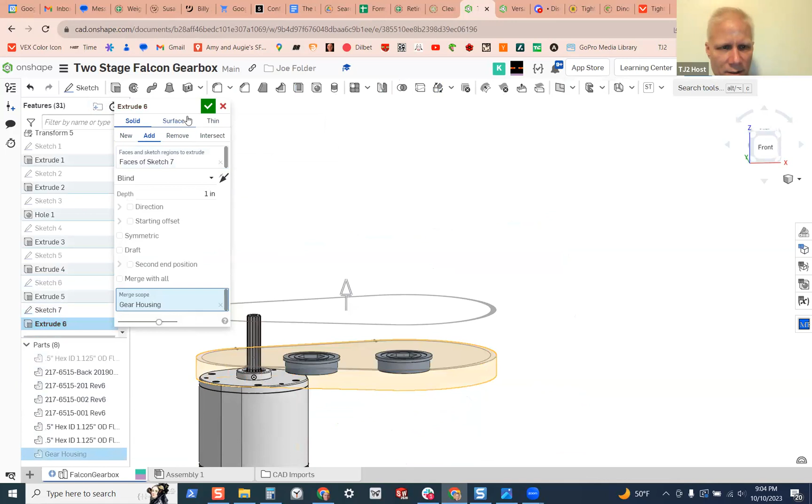That even worked? Yes, it did. Okay, so anyway, that's how we'll make our roof.

And then actually, now that I look at that, that isn't going to quite work because we don't have enough room for our screws. So we'll probably have to put some ears on this to give ourselves the ability to get our screws in and stuff. So anyway, we're getting there, but we're not there yet.

So I know it was a lot, but that's basically how, and then the next thing we'll do is we'll start bringing in the gears with the gear teeth. And then we'll stack them and we'll have shafts and we'll put a lid on it and all of that. So that is, I think, the easiest way to fix this.

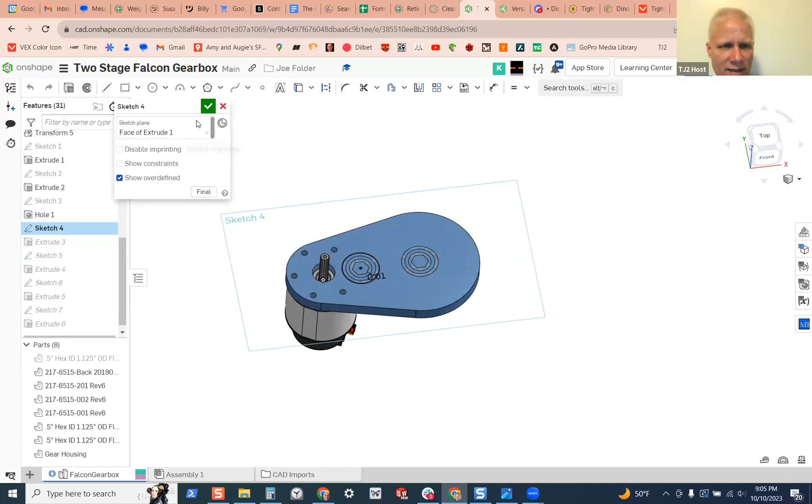Actually, the easiest way to fix this would actually just be to go back into that sketch, edit that sketch, and decide, no not that one, sorry. We should probably name this sketch, that's the sketch we want, edit that one. Instead of being 1.25, make it 1.5. And now there's enough room for the screw head.